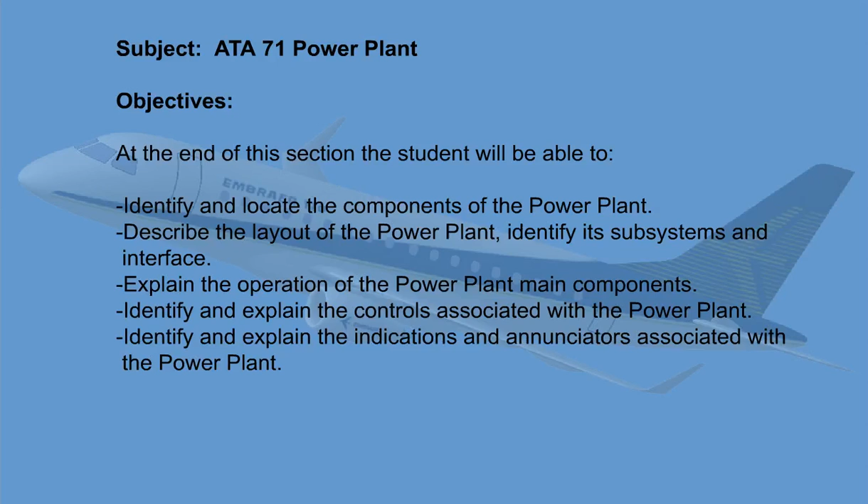Two GE CF34 turbofan engines designed for subsonic commercial airline service are installed on the Embraer E190. Each engine is housed in an aerodynamic nacelle and suspended from a pylon attached to the lower wing surface.

With a fan bypass pressure ratio of 5.4 to 1, a booster pressure ratio of 2.3 to 1, and a compressor pressure ratio of 11.4 to 1, the engine produces a maximum power of 18,820 pounds at ISA condition. The engine has a total length of 4.53 meters, 178.2 inches, a diameter of 1.85 meters, 72.8 inches, and an engine dry weight of 1,667 kilograms, 3,675 pounds.

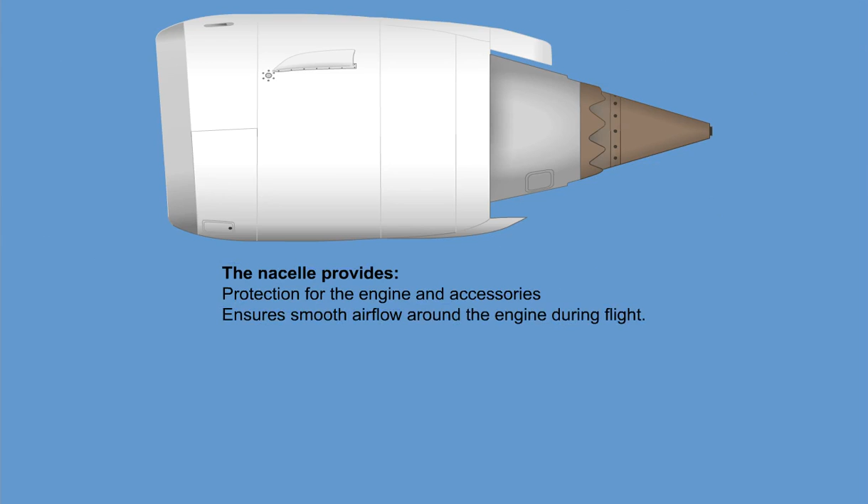The cowls which enclose the engine form the engine nacelle. The nacelle provides protection for the engine and accessories and also ensures smooth airflow around the engine during flight. The following cowls make up the engine nacelle: 1 inlet cowl, 2 hinged fan cowls, 2 hinged thrust reverser cowls, 2 hinged core cowls, and the primary exhaust nozzle.

The inlet cowl is a fixed interchangeable aerodynamic fairing which supplies the inlet airflow to the fan and to the core section of the engine. The inlet cowl is mounted on the forward face of the engine fan case and consists of an inlet lip, a forward bulkhead, an outer barrel, an acoustic inner barrel, an aft bulkhead, and an aft flange.

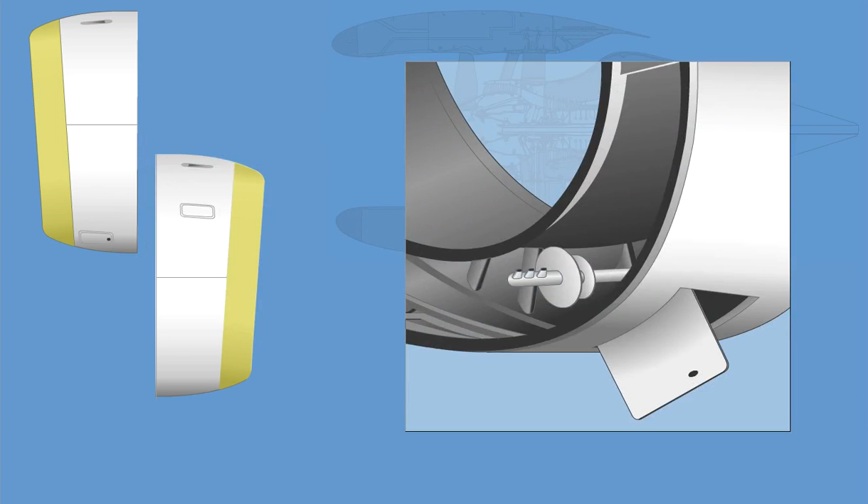The inlet lip is formed in a single piece and forms with the forward bulkhead a D-duct which contains the swirl nozzle. The purpose of the swirl nozzle is to deliver engine anti-ice air to the interior of the D-duct to heat the inner surface to prevent ice accumulation on the exterior surface of the lip skin. The anti-ice air is exhausted through 6 anti-ice exhaust ports located at the 6 o'clock position.

The outer barrel structure is made of an aluminum alloy and has panels to give access to components inside the inlet cowl. 2 inlets at the top let cool external air flow into the engine compartment for cooling, and a pressure relief door mechanically opens to release air pressure inside the inlet cowl. The outer barrel also has provisions for securing an inlet cover to protect the engine against foreign object debris, FOD.

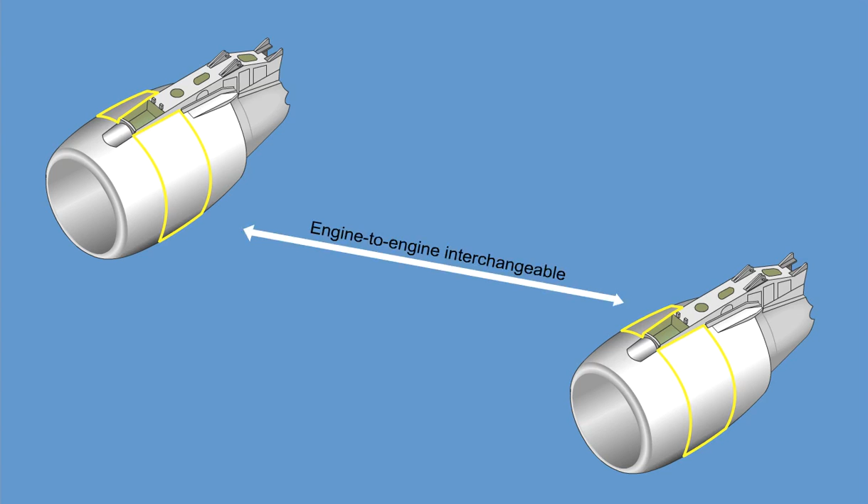The fan cowl door assemblies are engine-to-engine interchangeable units enclosing the engine fan case between the inlet cowl and the thrust reverser cowl. Each assembly is supported by 3 hinges at the pylon and latched to the other fan cowl along the bottom split line with 3 tension hook latches.

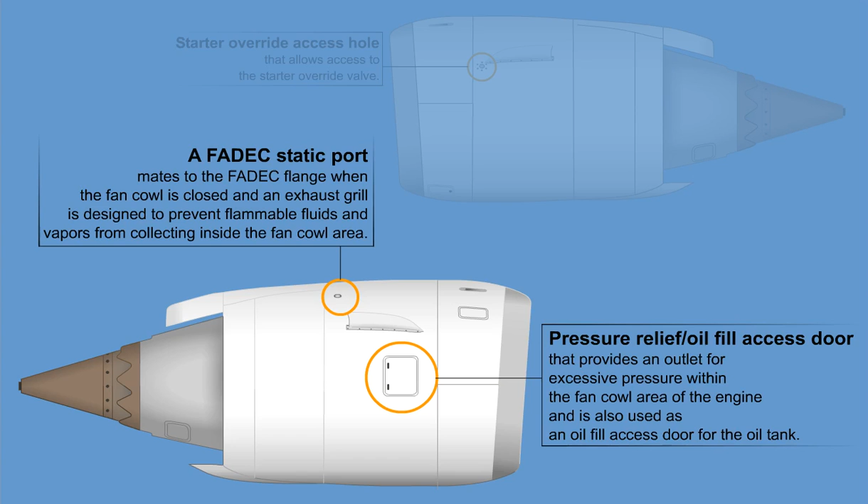The left fan cowl door contains a starter override access hole that allows access to the starter override valve. The right fan cowl door contains a pressure relief oil fill access door that provides an outlet for excessive pressure within the fan cowl area of the engine and is also used as an oil fill access door for the oil tank. A FADEC static port mates to the FADEC flange when the fan cowl is closed, and an exhaust grill is designed to prevent flammable fluids and vapors from collecting inside the fan cowl area.

The fan cowl may be opened to a maximum of 60 degrees and is held open by a rod which is stowed on the fan cowl.

The aft core cowls are located downstream of the thrust reversers and constitute the aft end of the engine core cowl, also serving as a pressure wall and a fire barrier between the engine core compartment and the fan duct.

Both aft core cowls can be opened to provide engine maintenance, are linked to the pylon by 3 hinges, and held together at 6 o'clock position by 3 latches. The doors are held open by support rods, which are mounted on each aft core cowl door. Note, the thrust reverser cowl must be opened before the aft core cowls can be opened.

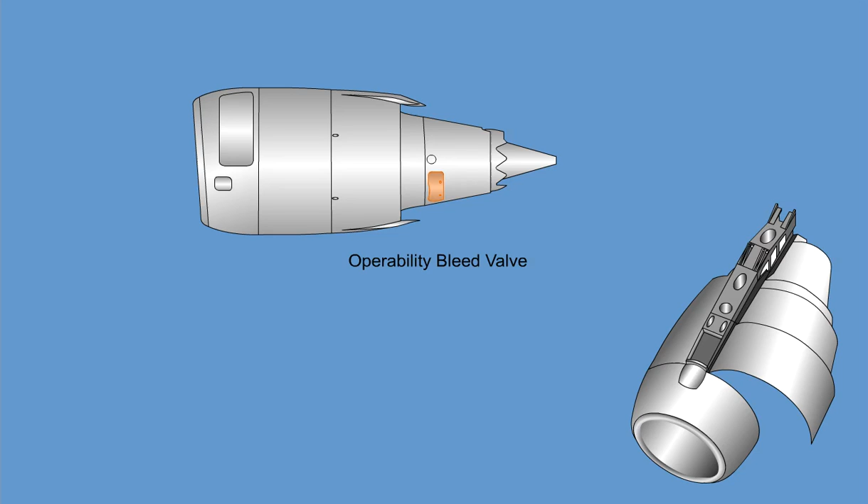The left aft core cowl has an operability bleed valve to allow engine bleed valve airflow to be discharged into the fan duct, and has a pressure relief door to minimize the amount of overpressure that can exist if an engine high-pressure duct fails. The right aft core cowl contains an engine oil service door used to access the oil filler port and an IDG oil sight glass door to access the IDG sight glass.

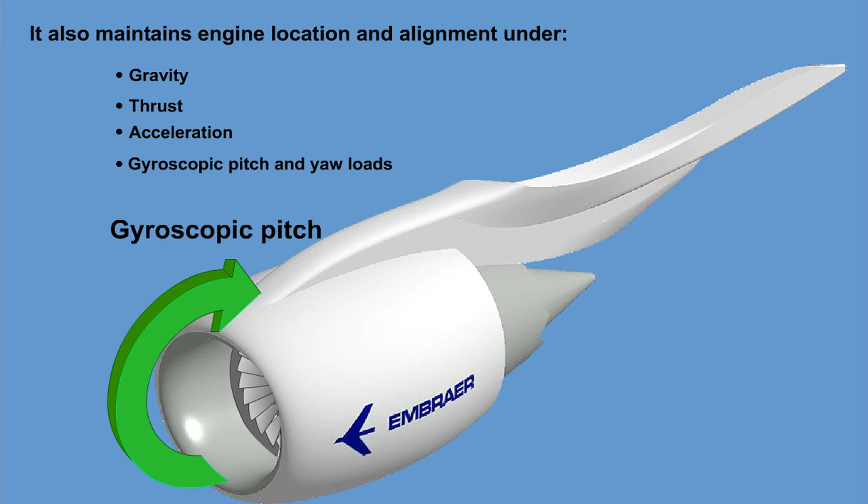The engine mounting system supports the engine by transmitting loads from the engine case to the pylon structure. It also maintains engine location and alignment under gravity, engine thrust, acceleration, and gyroscopic pitch and yaw loads encountered during any flight condition. The system isolates airframe deflections from the engine during any flight condition, accommodates thermal expansion of the engine, and permits simple engine installation and removal.

Each engine is connected to the pylon by a forward and an aft mount. The front mount attaches the fan OGV frame to the pylon and absorbs vertical, side, and torque loads. The aft mount attaches the engine mount ring and front frame to the pylon and absorbs vertical, side, and thrust loads.

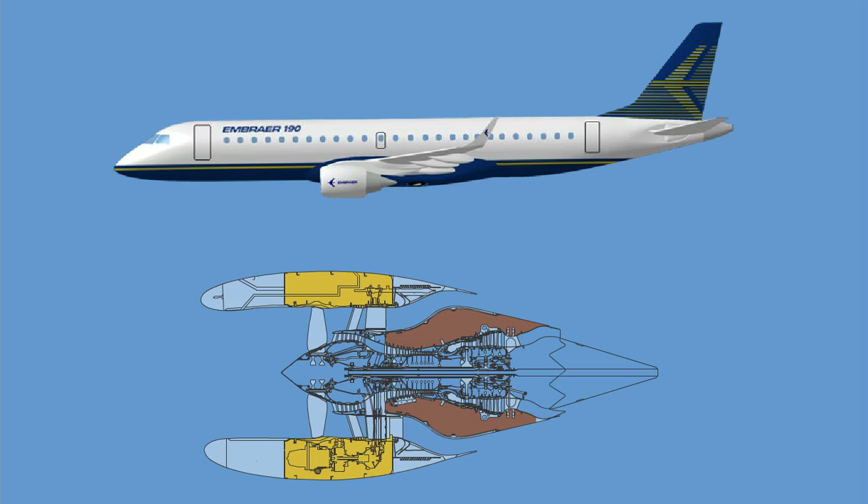The engine nacelle fire seals, made of fireproof materials, separate the cavities located between the engine and nacelle into sealed compartments to prevent the propagation of fire. The fire zone boundaries include the fan compartment and the core compartment. Each compartment has independent detection and fire extinguishing capability.

The inner fixed structure, IFS, of the thrust reverser core cowl forms the forward part of the engine core compartment fire zone and is covered on its inner side by fire blankets. The aft core cowl, ACC, forms the aft end of the fire zone and is made of an aluminum skin which contains a fireproof titanium sheet that is installed on the upper quadrant. A seal separates the forward IFS and the aft core cowl to form a zone closed off from the rest of the engine.

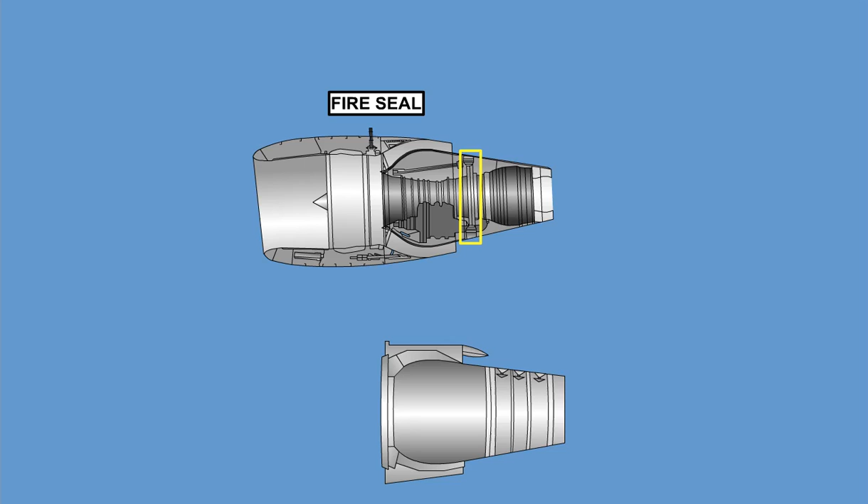The engine and nacelle drain system consists of lines and openings that direct any waste fluids from the engine and nacelle overboard. Two drain masts are used to discharge the drain fluids from the engine zones. The forward mast contains the accessory gearbox components and pad drains, as well as the oil scupper and pylon drains. The aft mast contains the fuel drains from the core-mounted components and the core pylon drain.

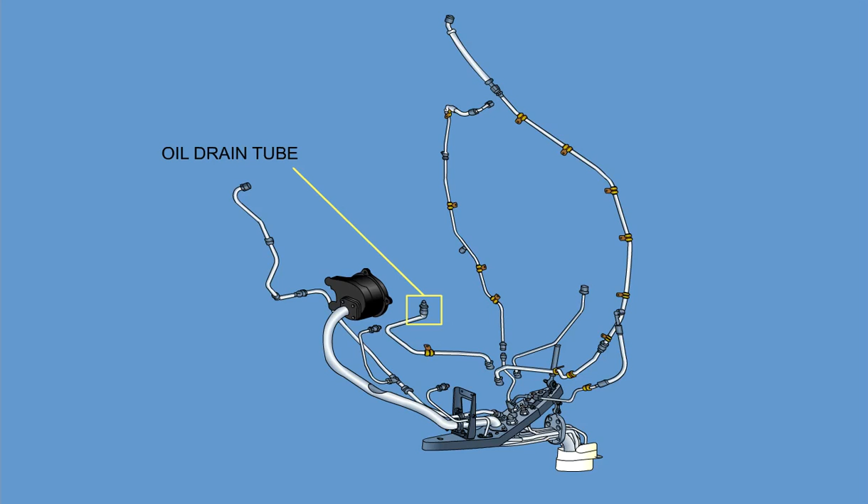The engine and nacelle drain system collects waste fluids that may accumulate during any abnormal operation. Oil is captured from the oil drain tube, the A-sump drain, and the air oil separator. Fuel is collected from the VGV actuators, the fuel pump pad on the accessory gearbox, the operability bleed valve, and the pylon. Hydraulic fluid is collected from the hydraulic pump on the accessory gearbox and from the pylon.

The force of gravity drains the fluids to a drain mast at the lowest point in the system, where they are discharged overboard. The drain mast is located behind the engine air intake, so that waste fluids will not be sucked into the intake. Fluids in the nacelle cavities drain directly from the cavity to the outside of the nacelle, through drain holes which are provided in the nacelle cowls.

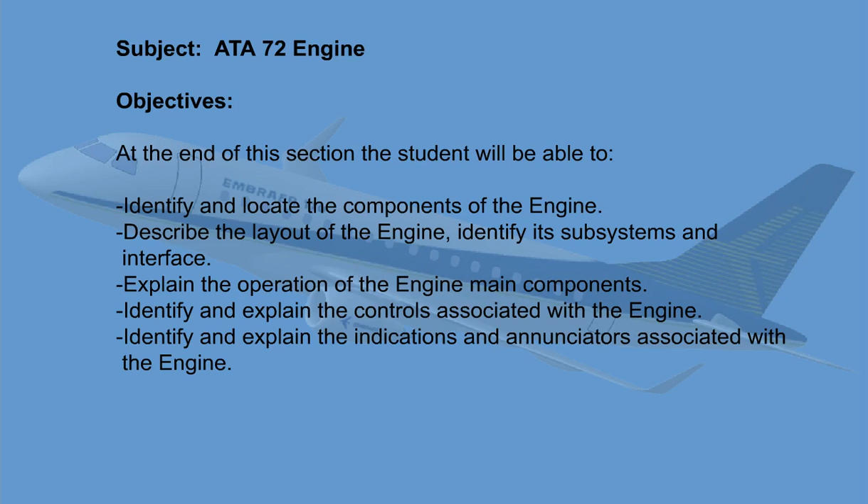The CF34-10E engine is a high-bypass turbofan engine which is a fully integrated engine with nacelle and thrust reverser. The core engine consists of the following modules: the fan module, the core module, the low-pressure turbine module, and the accessory gearbox module. The engine has a two-frame and two-sump structural design.

The fan module contains a 53-inch, 1,346 mm diameter single-stage fan and a three-stage low-pressure axial booster. The core module contains a 9-stage axial core compressor with bleed ports for customer bleed air connection at stages 5 and 9,

a single annular combustion chamber liner, a single-stage axial core air-cooled high-pressure turbine. The low-pressure turbine module contains a non-cooled 4-stage low-pressure turbine that drives the fan and axial booster. The accessory gearbox, mounted on the fan case, provides mounting pads for IDG and the hydraulic pump.

The engine low and high pressure rotors are supported by 5 main engine bearings. The low pressure rotor is supported by the number 1 thrust ball bearing, the number 2 and number 5 roller bearing. The high pressure rotor is supported by the number 3 thrust ball bearing and the number 4 roller bearing. The compressor rotor front shaft and the transfer gearbox are supported by ball bearing number 3.

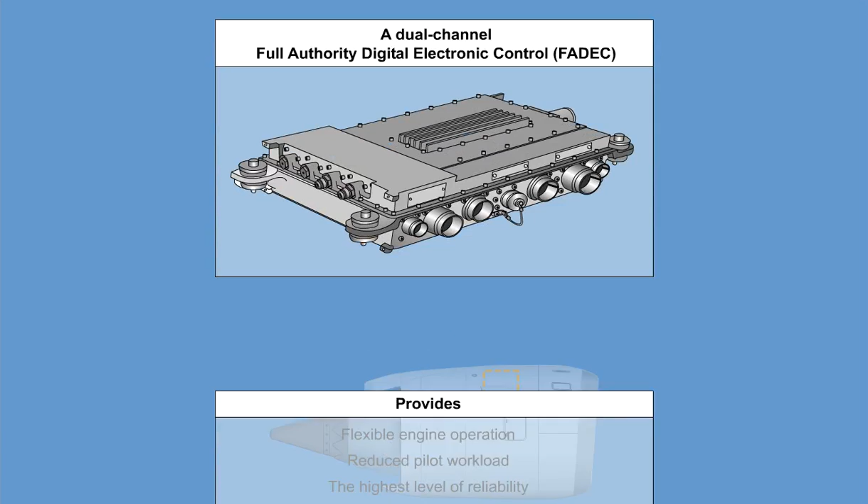A dual-channel, full-authority digital electronic control, FADEC, provides flexible engine operation, reduced pilot workload, and the highest level of reliability, safety, and maintainability.

The fan rotor and booster assembly provides the main thrust of the engine and also delivers air into the compressor section through the fan frame assembly. The low-pressure turbine rotor, via the fan drive shaft, provides driving power to the assembly.

The fan rotor and booster assembly main components are the fan rotor spinner, the fan rotor spinner support, the fan rotor blade retainers, the fan blade spacers, the Stage 1 fan rotor disc, the fan rotor Stage 1 blades, the Stage 1 fan rotor blade shims, and the booster assembly.

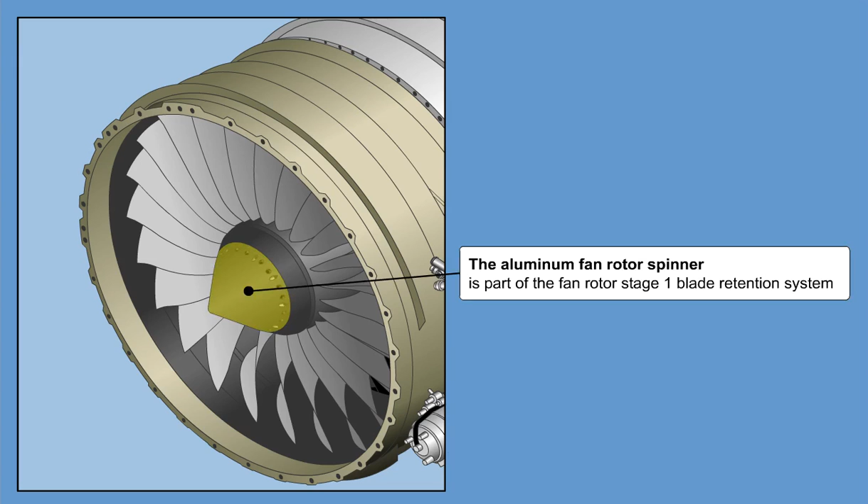The aluminum fan rotor spinner is part of the fan rotor Stage 1 blade retention system. For fan balancing, the mid-flange has tapped holes to install the trim balance screws. The design of the nose cone prevents ice formation.

The fan rotor spinner is bolted to the fan rotor spinner support, that again is bolted to the Stage 1 fan rotor disc.

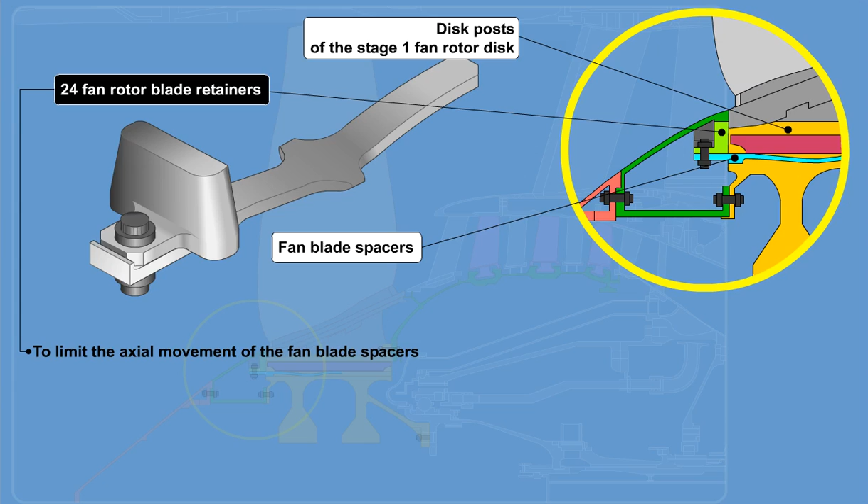24 fan rotor blade retainers are installed between the disc posts of the Stage 1 fan rotor disc and bolted to the fan blade spacers to limit the axial movement of the fan blade spacers. The retainers and the spacers are both part of the fan rotor Stage 1 blade retention system.

The fan blade spacers are installed between the dovetail slots of the Stage 1 fan rotor disc and the fan rotor blade shims to limit the radial movement of the fan rotor Stage 1 blades.

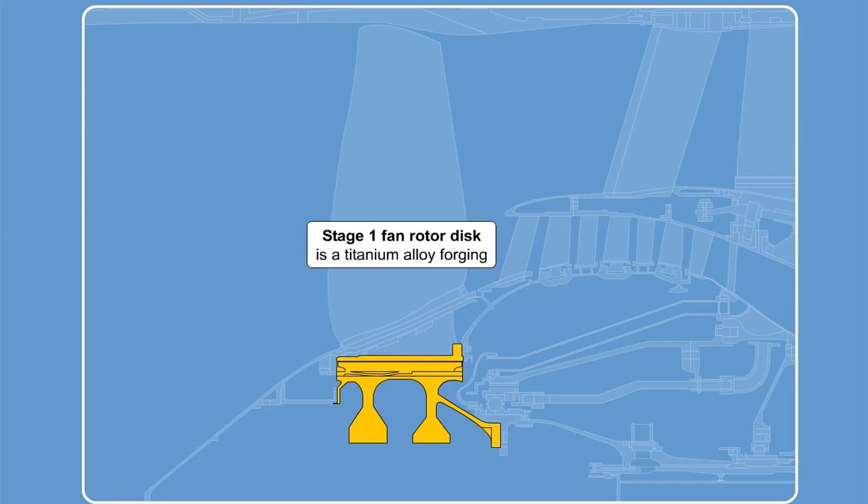The Stage 1 fan rotor disc is a titanium alloy forging. Its inner rear flange provides attachment for the fan shaft, and its outer rear flange is bolted to the booster spool. The outer front flange supplies attachment for the fan rotor spinner and the fan rotor blade retainers. The inner front flange supplies attachment for the fan rotor spinner support.

The outer rim of the Stage 1 fan rotor disc has 24 dovetail slots designed for fan rotor Stage 1 blade retention.

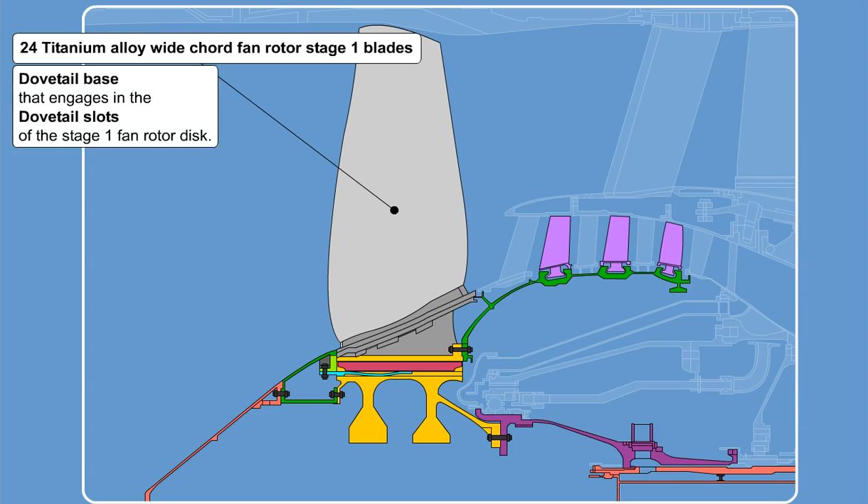24 titanium alloy wide chord fan rotor Stage 1 blades are installed in the Stage 1 fan rotor disc. Each of the fan blades has a dovetailed base that engages in the dovetail slots of the Stage 1 fan rotor disc. Blade shims are installed in the dovetail slots to limit the radial movement of each fan blade.

The booster assembly consists of the booster spool, the Stage 2 through 4 fan rotor blades, which serve primarily to supercharge the compressor rotor assembly, and the Stage 1 IGV through Stage 4 vane assemblies. The booster assembly is mounted on the rear of the Stage 1 fan rotor disc and acts as a stop for the fan rotor Stage 1 blades.

The fan frame assembly is the main forward support for the installation of the engine to the aircraft. It supports the fan and booster assembly and compressor rotor assembly and supplies ducting for primary and secondary airflows.

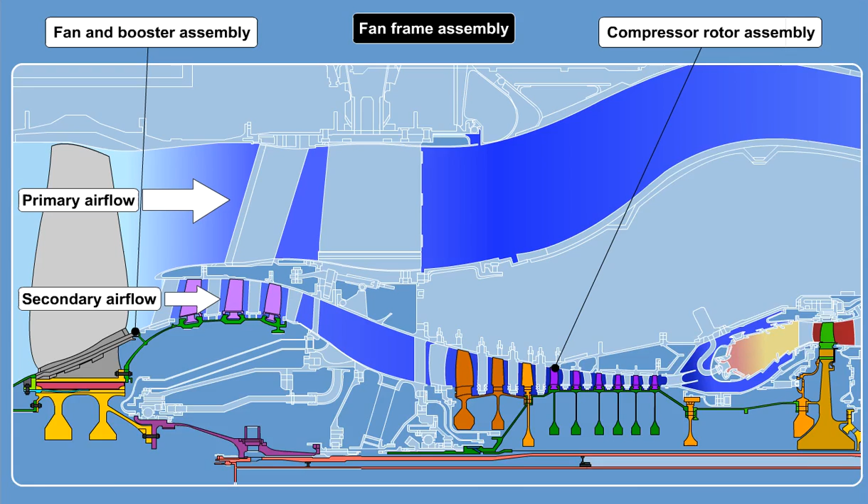The fan frame assembly consists of the fan frame, the aft fan case, the OGV fan stator vane assemblies, the fan outlet guide vane fairing, the splitter, and the fan stator containment case.

The aft fan case provides an inlet airflow path to the core engine and houses the accessory drive PTO bevel gears and driveshaft assembly, the variable bypass valve system, and provides attachment points for the OGV fan stator vane assemblies.

The fan frame is a basic 12-strut hub structure that provides supports for the PTO and the number 1 and number 3 bearings. The hollow struts have passages for equipment like the fan speed sensor and oil lines.

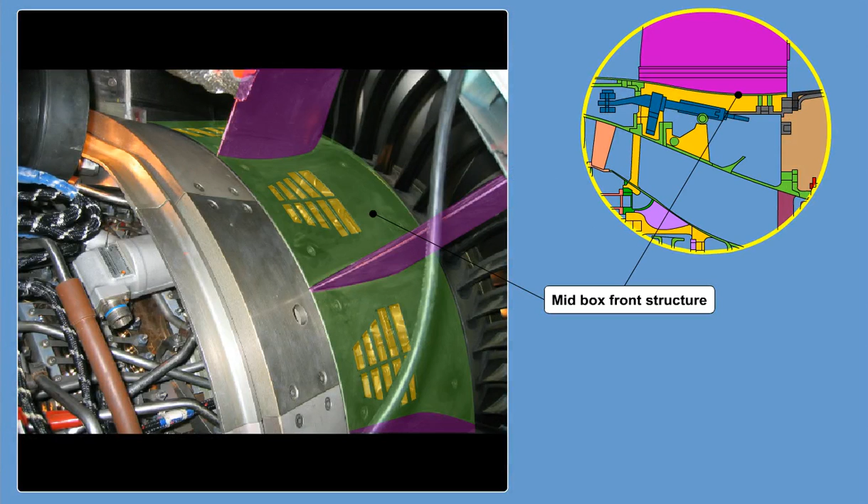The midbox front structure, located between the primary and secondary airflows, houses the 12 VBV doors and 2 VBV actuators at the 1:30 and 7:30 o'clock positions.

The OGV fan stator vane assemblies are individual vanes made of carbon fiber epoxy. The vane inner platforms are axially retained by the fan outlet guide vane fairing, while the vane outer platforms are attached with bolts to the aft fan case.

The fan outlet guide vane fairing, mounted between the fan frame and the splitter, contains grommets that support the inner platforms of the OGV fan stator vane assemblies.

The splitter is a fairing that divides the airflow into the booster assembly and fan bypass duct.

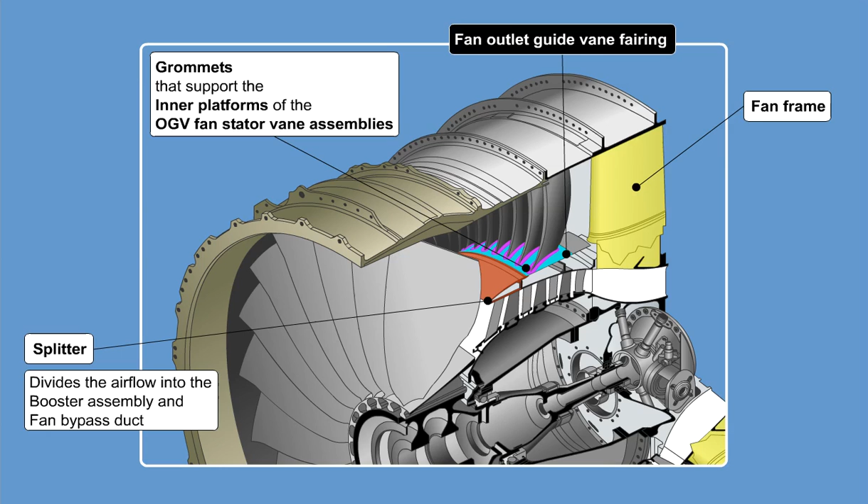The fan stator containment case provides fan rotor stage 1 blade containment in the event of a fan blade fracture. It also provides attachment points for the inlet cowl and houses the abradable liner for the fan rotor stage 1 blade tips.

The compressor section is located between the fan frame assembly and the combustion section and includes the compressor stator assembly and the compressor rotor assembly.

The compressor stator assembly is divided into a forward and rear compressor stator assembly and provides structural support for the engine between the fan frame assembly and the combustion chamber frame.

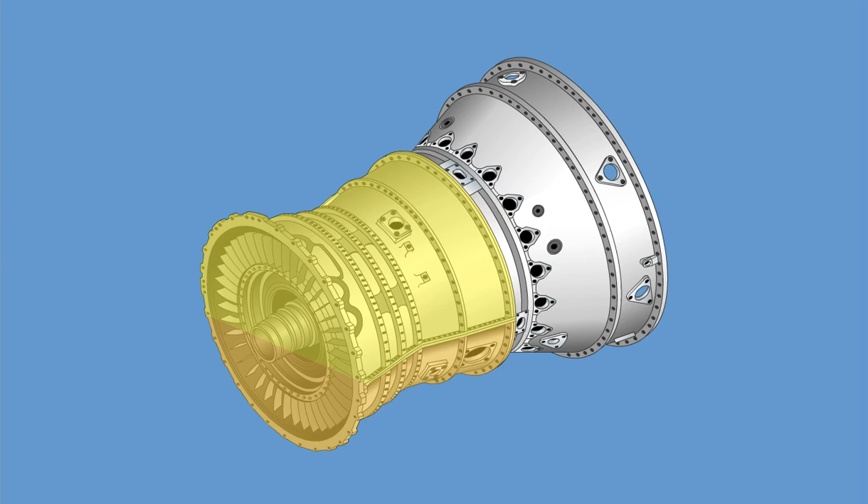The compressor stator case consists of 2 halves joined at a horizontal split line that permits on-wing removal of the top case half. The compressor stator case includes 2 integral air manifolds and stage 5 and stage 9 ports for bleed air connections.

Actuating arms and rings, controlled by the actuating system linkage assembly, control the position of the variable vanes of the inlet guide vanes and stage 1 through stage 3.

Stage 4 through stage 8 vane segments are installed into the ends of the compressor stator case and split on a horizontal plane to match the compressor case split line.

The compressor rotor assembly, together with the compressor stator assembly, compresses the air and discharges this air into the combustion chamber. The compressor rotor is a 9-stage axial flow design with a pressure ratio of 11.4 to 1. Components are held together at the stage 3 disc joint and at the compressor discharge pressure seal joint, which creates a rigid drum.

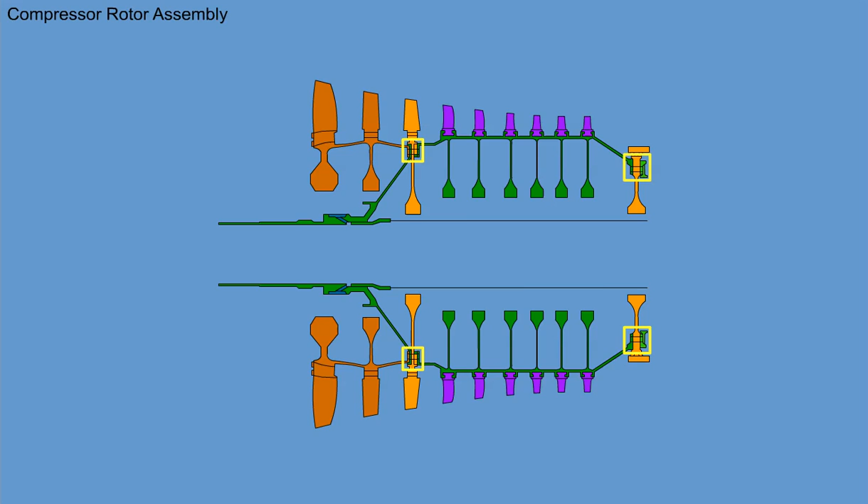The compressor rotor assembly consists of the compressor rotor forward shaft, the compressor rotor stages 1 and 2 spool, the compressor rotor stage 3 disc, the compressor rotor stages 4 through 9 spool, the compressor rotor stages 1 through 3 blades, the compressor rotor stages 4 through 9 blades, and the compressor rotor rear rotating air seal.

The compressor rotor forward shaft, bolted to the stage 3 disc, provides forward support for the compressor rotor assembly and contains splines that engage the compressor rotor assembly with the horizontal bevel gear of the power takeoff assembly.

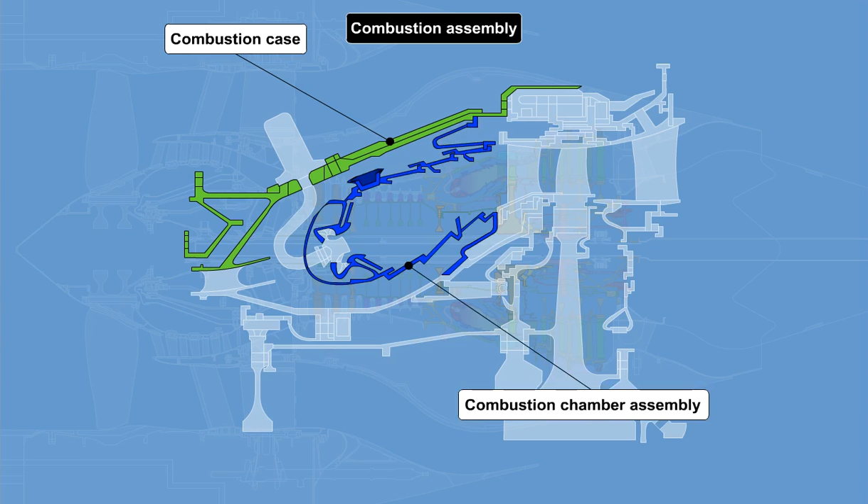The combustion assembly is installed between the compressor section and the low-pressure turbine module assembly and provides a flow path between the compressor section and the low-pressure section. The combustion assembly consists of the combustion case, the combustion chamber assembly, the high-pressure turbine stator interstationary seal, and the turbine nozzle assembly.

The combustion case contains bore scope inspection ports to access the combustion chamber, the high-pressure turbine rotor blades, and the Stage 1 low-pressure turbine blades.

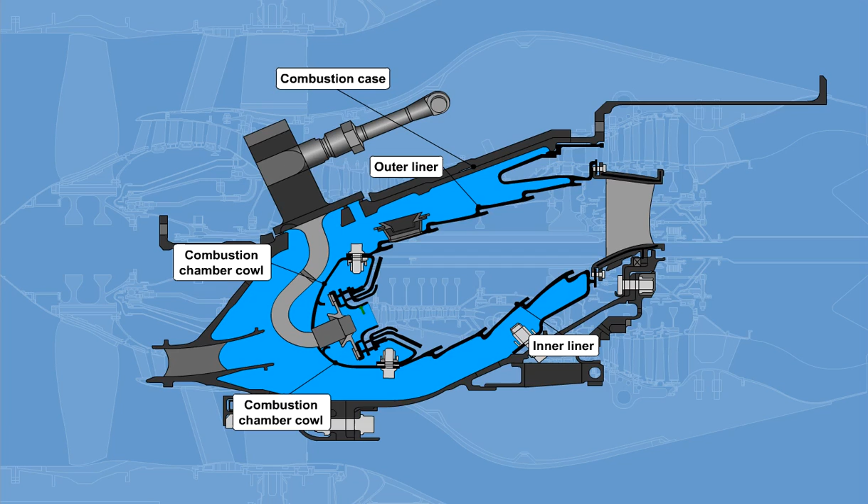The annular combustion chamber assembly provides a housing for the ignition of the fuel-air mixture. Air that exits the compressor is diffused into the combustion case. The inner and outer liner, supported by the combustion chamber cowl, capture the compressor discharge air for metering the airflow to the dome. Most of the dome airflow passes through the primary swirlers into the reaction zone, where it serves as primary combustion air. The remainder of the dome airflow is used for dome cooling.

The primary swirlers are fuel-air mixing devices which use high-energy air to atomize and aerate the fuel. The atomized mixture is introduced into the combustor reaction zone where it is ignited by the high-voltage igniters. Air that passes into the inner and outer passages of the combustion chamber shells serves as secondary air cooling to reduce turbine inlet temperature cooling of the combustor shells and other engine parts.

The turbine nozzle assembly is a single-stage air-cooled assembly that is mounted to the aft flange of the combustion chamber liner. The turbine nozzle assembly contains 19 high-pressure turbine stator nozzle segments that direct the gas flow from the combustion chamber assembly onto the high-pressure turbine rotor blades at the most optimal angle to permit the greatest performance during all conditions of operation.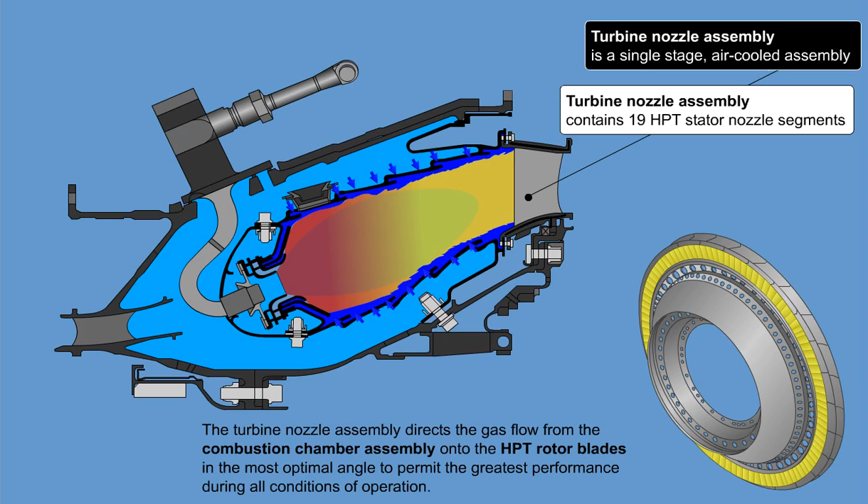The high-pressure turbine Stage 1 nozzle assembly directs the force of hot, high-velocity, high-pressure gas into the Stage 1 high-pressure turbine rotor blades. The high-pressure turbine Stage 1 nozzle assembly consists of the inner high-pressure turbine nozzle support and the 19 Stage 1 high-pressure turbine nozzle segments.

The nozzle segments, each with 2 vanes, are constructed of nickel alloy and are coated for environmental protection. The vanes are cooled by the compressor discharge air, which enters the vane segments at the top and exits the vanes through holes at the leading and trailing edges.

The high-pressure turbine HPT module consists of the HPT rotor assembly and the HPT stator assembly.

The high-pressure turbine rotor extracts energy from the combustion gases that exit the combustion liner and drives the compressor rotor assembly.

The HPT rotor assembly consists of the HPT rotor disc, the HPT front rotating air seal, the HPT rotor front shaft, the HPT rotor blades, the HPT rotor rear blade retainer, the HPT rear rotating seal, and the HPT rear shaft.

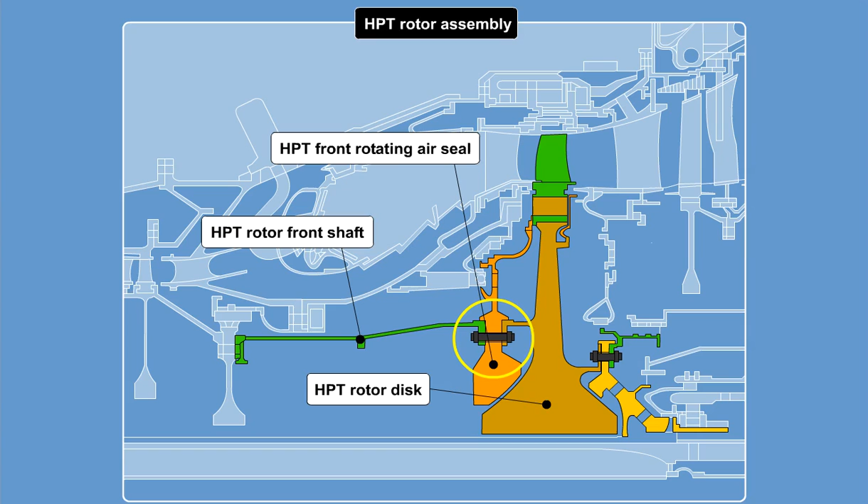The HPT rotor disc provides an attachment point on the forward flange for the HPT front rotating air seal and the HPT rotor front shaft that connects the HPT rotor disc to the compressor.

The HPT rotor blades have dovetail shanks that fit in slots of the HPT rotor disc and are axially locked in place by the HPT rotor rear blade retainer.

The blade airfoil and platform are top-coated with a white ceramic thermal barrier coating to lower the metal temperature and improve part life. Blade cooling is performed by compressor discharge air that enters the blade root and is forced out through holes in the blade leading edge, trailing edge, and the blade tip.

The HPT rear shaft, which is bolted to the HPT rotor disc, provides the aft support for the HPT rotor assembly.

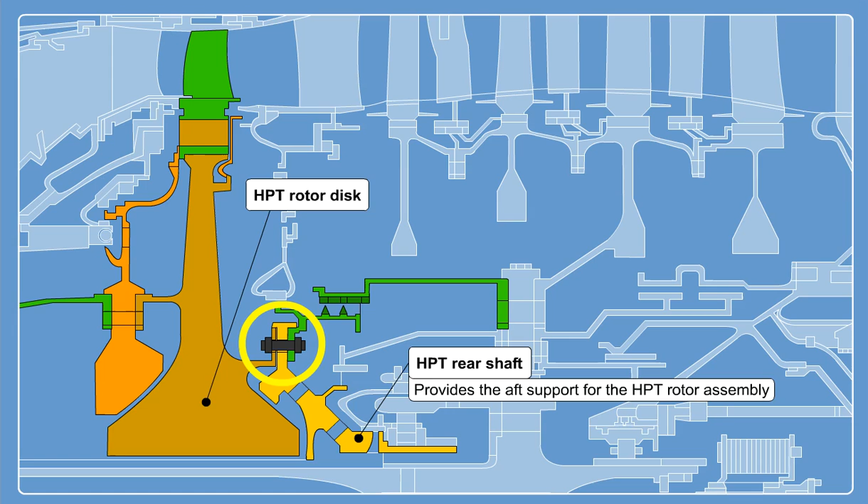Seal teeth of the HPT rear shaft and the honeycomb of the inner forward air rotating seal of the LP shaft assembly form a seal for the number 4 roller bearing sump.

The low-pressure turbine, LPT, rotor and stator assembly converts gas energy to rotational force required to drive the fan rotor and booster.

The LPT rotor consists of a 4-stage, tip-shrouded blade disc assembly and the stage 1 to 4 low-pressure turbine nozzles.

The stage 1 low-pressure turbine nozzle, which is mounted in the combustion case, is impingement cooled by high-pressure compressor 4th-stage bleed air. All other low-pressure turbine nozzle airfoils, stages 2 through 4, which are mounted in the low-pressure turbine case, are not air-cooled.

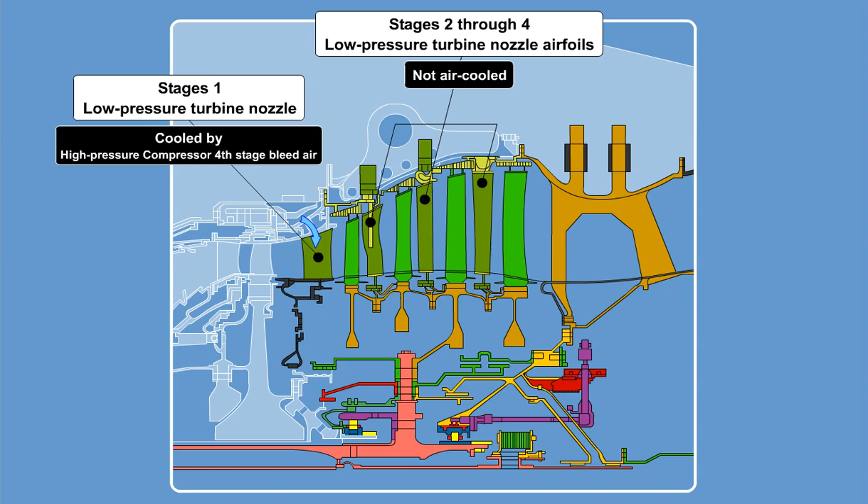To prevent air leakage between the 4 low-pressure turbine stages, integral inner seals on the low-pressure turbine nozzles run against interstage seals that are mounted on the low-pressure turbine rotor. The stages 1 through 4 shroud segments have open-face honeycomb wear surfaces to minimize air leakage at the LPT blade tips.

The LPT rotor consists of a 4-stage tip-shrouded blade disc assembly. The 4 discs and the interstage seals are fastened together with close-fitting bolts. The low-pressure turbine assembly is bolted to the low-pressure turbine shaft via the stage 3 disc and interfaces with the fan drive shaft with splines. The stage 1 to 4 low-pressure turbine blades are held in the discs by retainers, while the shrouded blade tips have interlocks that keep them rigid.

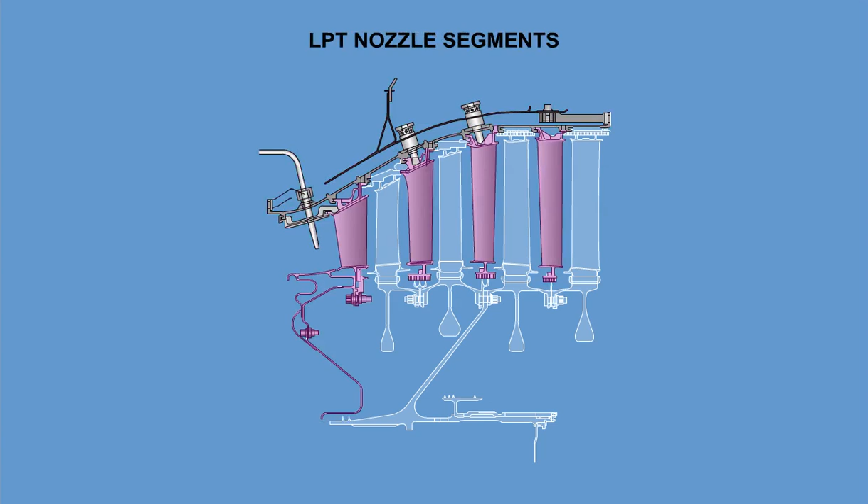The LPT case contains the LPT nozzle segments and the LPT shroud segments. The non-air-cooled stage 2 through 4 nozzle vane segments have integral inner seals against the interstage seal. The stage 1 through 4 shroud segments have open-face honeycomb wear surfaces to minimize air leakage at the LPT blade tips.

The turbine exhaust frame assembly is the third of 3 major structural frames in the engine. It is also the main structural support for the low-pressure turbine rotor and stator assembly. The turbine exhaust frame assembly supports the C-sump, which houses the number 5 bearing outer races.

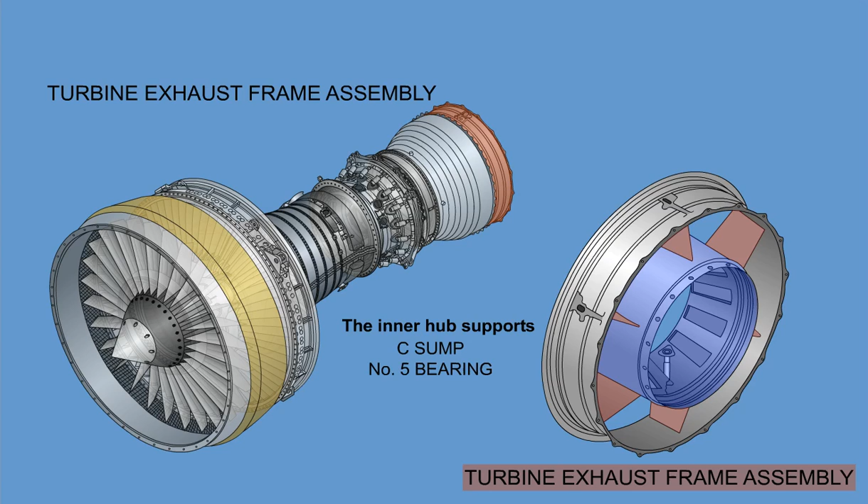The inner and outer cases are connected by 6 struts located at the 2, 4, 6, 8, 10, and 12 o'clock positions. The 6 struts support the inner hub, which supports the C-sump and the number 5 bearing. Service lines into and out of the C-sump are routed through 3 of the 6 struts.

The Engine Accessory Gearbox, AGB module, is a mechanical system that translates engine power to drive the engine accessories. The drive systems consist of the accessory gearbox, AGB module, the transfer gearbox, TGB, the radial drive shaft, and the inlet gearbox, IGB.

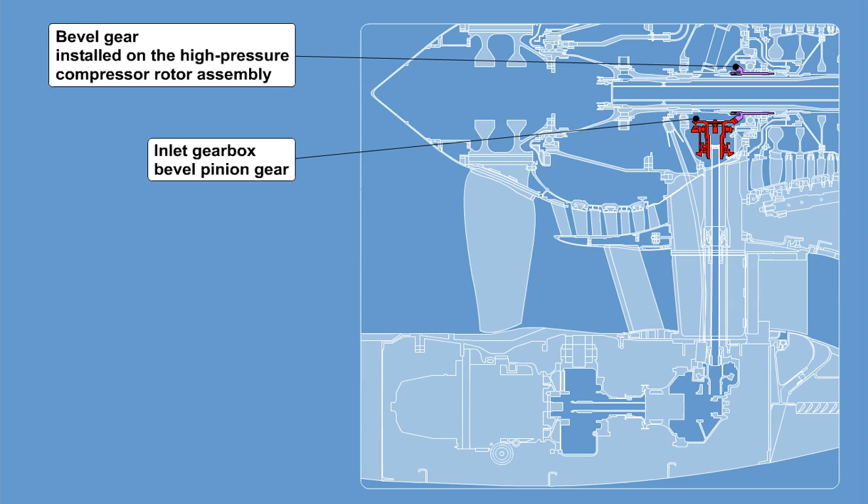Drive power from the engine to the accessory gearbox assembly is provided by a bevel gear installed on the high-pressure compressor rotor assembly, which interfaces with the inlet gearbox bevel pinion gear. The inlet gearbox bevel pinion gear is splined to the radial drive shaft, which passes through the number 10 strut in the fan frame assembly to drive the transfer gearbox.

The transfer gearbox assembly, installed on the fan frame at the 9 o'clock position, provides power transmission between the inlet gearbox assembly and the accessory gearbox module, and consists of the outer radial drive shaft, the transfer gearbox, and the horizontal shaft.

The outer radial drive shaft is installed inside the number 10 strut of the fan frame and is on one end internally splined to the inner radial drive shaft and on the opposite side externally splined to connect with the transfer gearbox axis-A pinion bevel gear.

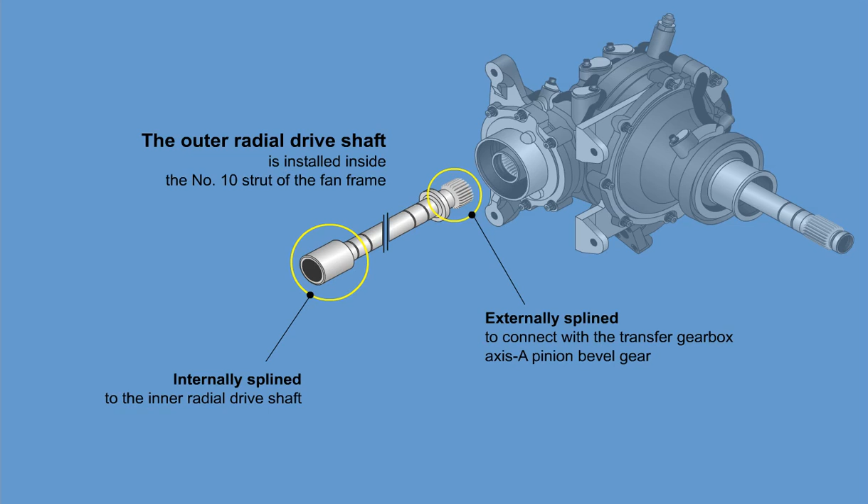The horizontal shaft supplies power transmission between the transfer gearbox and the accessory gearbox assembly and is splined at both ends. One end of the horizontal shaft connects with the accessory gearbox gear shaft, and the other end of the horizontal shaft connects with the splines of the axis B wheel bevel gear.

The accessory gearbox, AGB, is rigidly supported by the fan frame at 3 locations and is a cast 2-piece housing, with drive pads on the forward and aft faces of the gearbox to allow mounting of the accessories.

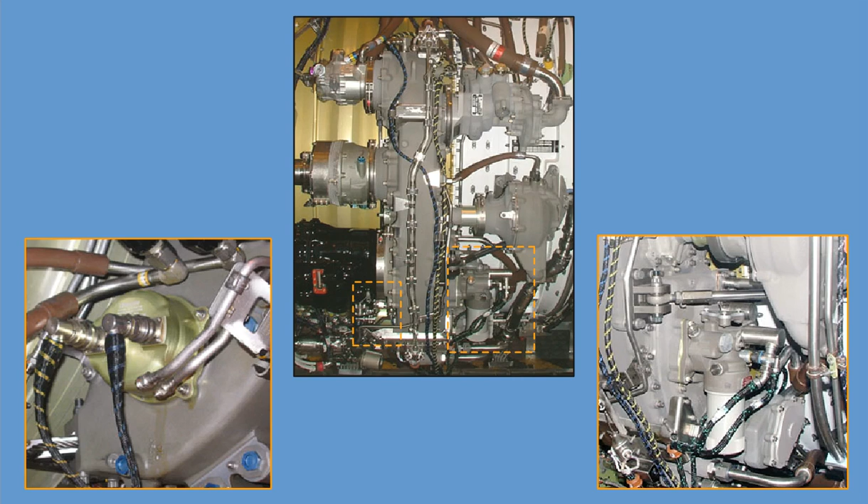The aft face of the accessory gearbox provides mounting pads for the lube and scavenge oil pump, the oil filter manifold, the engine-driven fuel pump, and the input connection for the horizontal drive shaft.

The front face of the accessory gearbox provides mounting pads for the engine-driven hydraulic pump, the PMA, the air turbine starter, and the IDG. A drain plug is located at the 7 o'clock position to allow drainage of the accessory gearbox cavity for shipping or troubleshooting purposes.

The engine fuel system has 2 subsystems, a fuel control system and a fuel distribution system, which provides the engine with scheduled fuel for combustion.

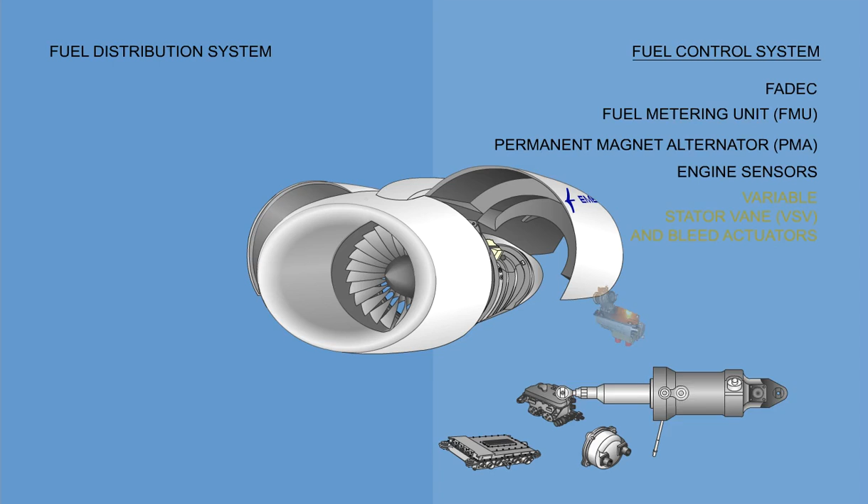The engine fuel control system is composed of a 2-channel full authority digital electronic control, FADEC, a fuel metering unit, FMU, a permanent magnet alternator, PMA, engine sensors, variable stator vane and bleed valve actuators, a transient bleed valve, TBV, and the high-pressure turbine clearance control, HPTCC valve.

The components of the fuel distribution system include the fuel pump, fuel filter, 2 fuel manifolds, and 20 fuel injectors.

The fuel distribution system starts when the fuel from the aircraft fuel tank enters the engine fuel pump inlet, where the fuel pressure is increased by a centrifugal boost pump located in the engine fuel pump. Fuel discharged from the boost pump splits inside the pump housing and is either returned via the positive displacement motive gear stage to the aircraft as motive flow or routed toward the main gear pump inlet.

The flow that is not directed to the aircraft as motive flow leaves the boost pump and joins up with the return or bypass flow coming from the FMU. This combined flow then passes through the main fuel oil heat exchanger to cool the engine lubricating oil. The fuel oil heat exchanger also heats the fuel to provide icing protection in the event of trapped water in the fuel during cold day operation.

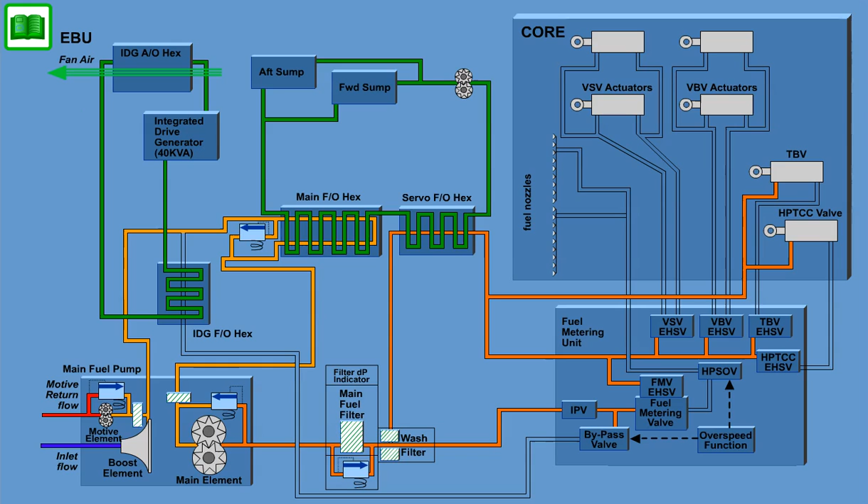The EHSVs operate the fuel metering valve, FMV actuator, the variable stator vane, VSV actuators, the variable bypass valve, VBV actuators, the high-pressure turbine clearance control, HPTCC valve, and the transient bleed valve, TBV.

The main flow exiting the fuel filter is directed to the inlet of the FMU. Fuel entering the FMU passes through the inlet pressurizing valve, IPV, and then enters the bypass valve. At the bypass valve, the fuel is either returned to the pump or is directed to the metering valve.

The metering valve is positioned by the FADEC to provide the proper burn flow to the combustion chamber fuel injection nozzles. Metered fuel flow exits the FMU through the shut-off valve to the 2 fuel manifolds, where it is distributed to the 20 fuel nozzles.

The fuel control system is managed by a 2-channel full-authority digital electronic control, FADEC. The FADEC controls the engine fuel requirements in response to thrust command inputs from the aircraft.

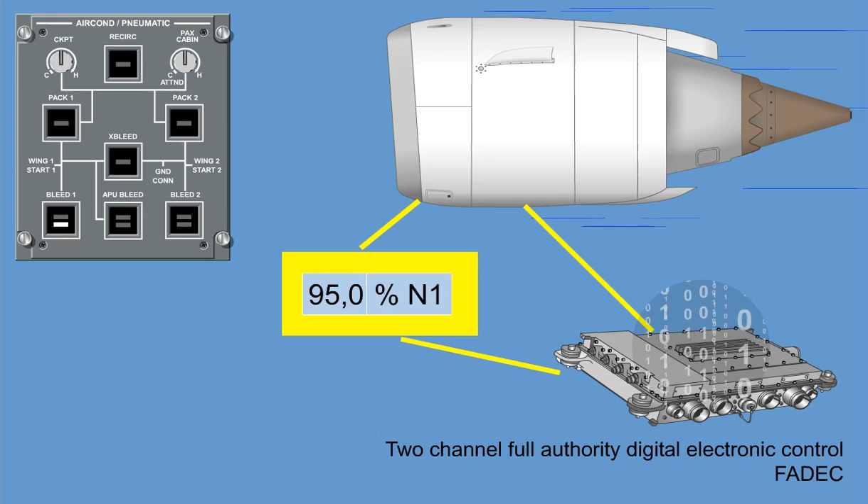The FADEC software provides thrust management based on aircraft and air data inputs. These inputs are used to calculate appropriate reference N1 for any given throttle position.

Some of the N1 references are modified by discrete inputs like Automatic Takeoff Thrust Control System, ATTCS, Thrust Reverser Position, Weight on Wheels, and Bleed discrete inputs.

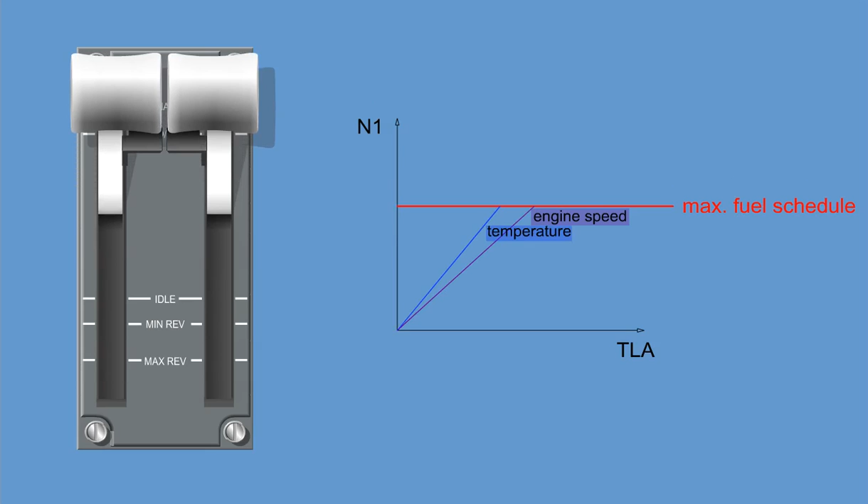In addition to setting the correct N1 for a given TLA position, the FADEC schedules limit fuel to protect the engine speeds, temperature, and compressor discharge pressure, CDP, limits.

The fuel pump, mounted on the aft face of the accessory gearbox, provides sufficient fuel flow and pressure to meet engine burn flow requirements, as well as fuel for the fuel-operated actuators and valves, and motive flow for the fuel tank ejector pumps. The fuel pump consists of a centrifugal boost element and 2 fixed displacement high-pressure gear elements.

The fuel pump has a spline drive shaft that engages a wet spline within the AGB pad, and a V-band coupling secures the fuel pump to the accessory gearbox.

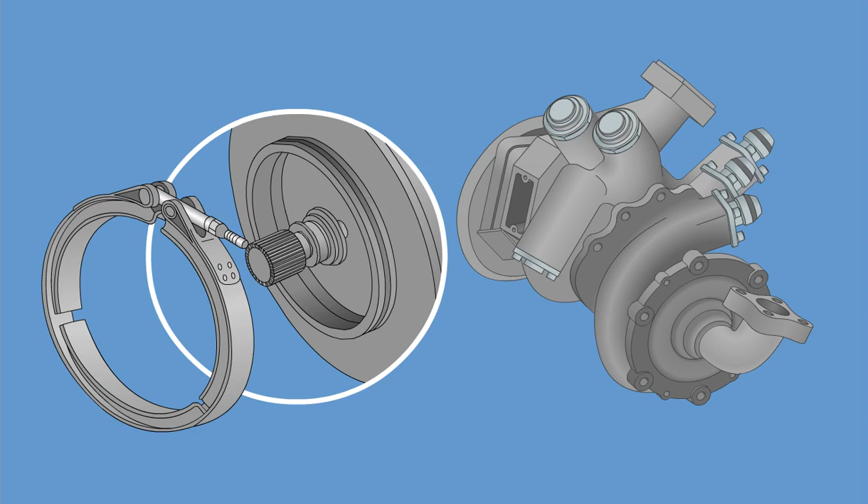Filtration of the fuel system is provided by a main fuel filter, which is mounted at the 3 o'clock position of the fan case. The filter contains a differential pressure switch that provides indication in the event of an impending bypass. In the event of a complete filter blockage, a bypass valve opens to ensure fuel supply to the FMU.

To minimize fuel spillage during fuel filter replacement, the filter bowl contains a drain plug to drain the filter bowl before removing the filter element.

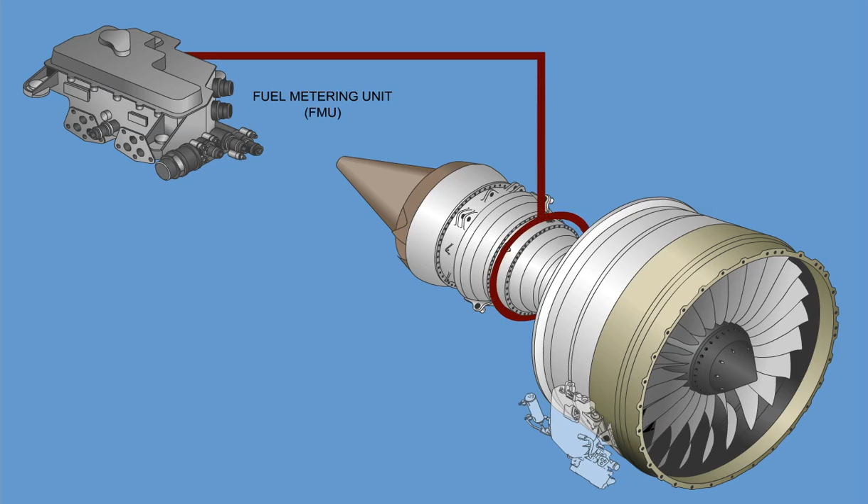The fuel metering unit, FMU, is mounted on brackets attached to the fan case at the 5 o'clock position. The main purpose of the FMU is to provide accurate metered fuel flow to the engine for combustion. The FMU also provides fuel flow for variable stator vane and variable bypass valve actuation, operates the high-pressure turbine clearance control valve and the transient bleed valve, and provides fuel shutoff for normal engine shutdown and for overspeed protection.

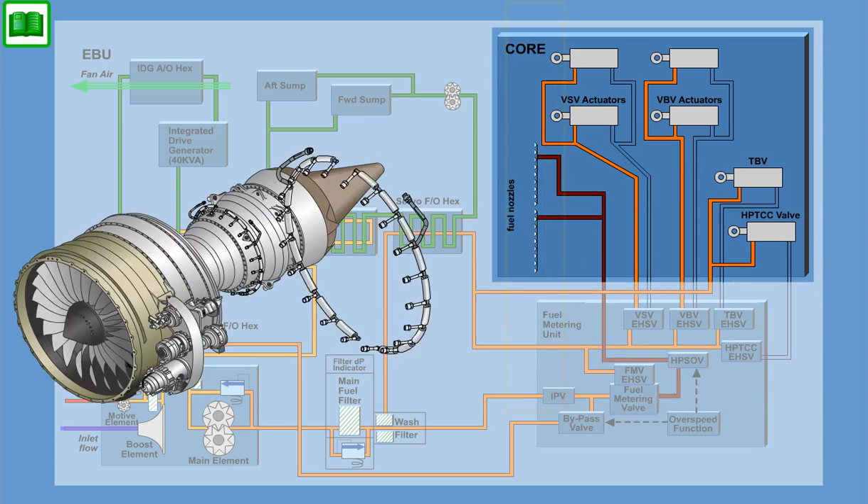Fuel from the main fuel barrier filter and servo wash filter enters the FMU, where it passes through the inlet pressurizing valve, IPV. The fuel then enters the bypass valve and is either returned to the pump or passes through the valve to the metering valve. The metering valve is positioned by the FADEC to provide the proper burn flow to the fuel nozzles. Metered fuel flow exits the FMU and passes through the fuel manifold, where it is distributed to the 20 fuel nozzles. The fuel manifold is located around the circumference of the combustion chamber frame, just aft of the forward flange.

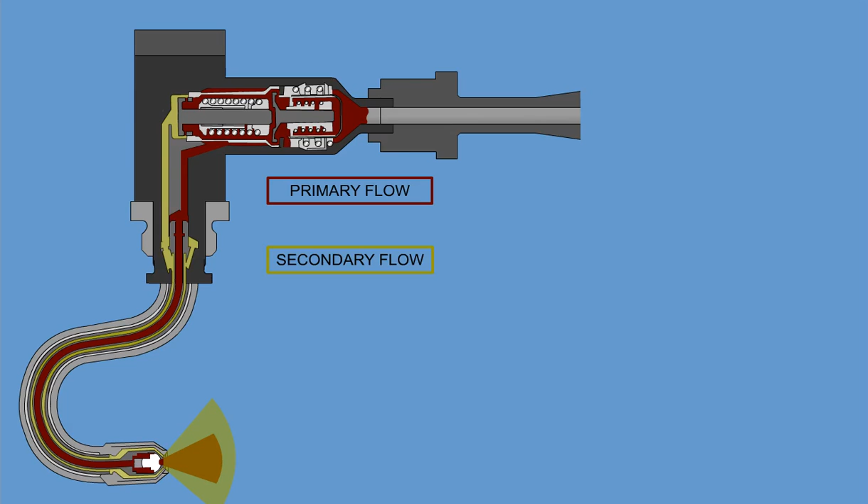Fuel coming from the FMU enters the fuel manifold and is distributed to the 20 fuel nozzles. The fuel injectors receive the metered fuel from the FMU and atomize it into the domed combustor. Based upon the fuel pressure delivered, a distributor valve located in the fuel injector ports fuel to the primary and secondary fuel flow circuits. The primary circuit is used during start and low power, while the secondary circuit provides additional flow at high power. Each fuel injector has a check valve that closes at engine shutdown to prevent the manifolds from draining into the combustor.

The variable bypass valve system controls the booster operating limits, provides optimum booster performance at steady-state conditions, and prevents stall. The system consists of 2 VBV actuators which operate via adjustable links, bell cranks and actuating rings, and 10 VBV doors that open to bleed excess booster discharge airflow or close to allow zero bleed.

The VBV system is controlled by the FADEC and operates from idle, doors open, to takeoff power, doors closed. During reverse thrust, the FADEC will partially open the VBV doors to increase booster stability and to prevent core engine foreign object damage. During engine shutdown, the VBV doors are driven open.

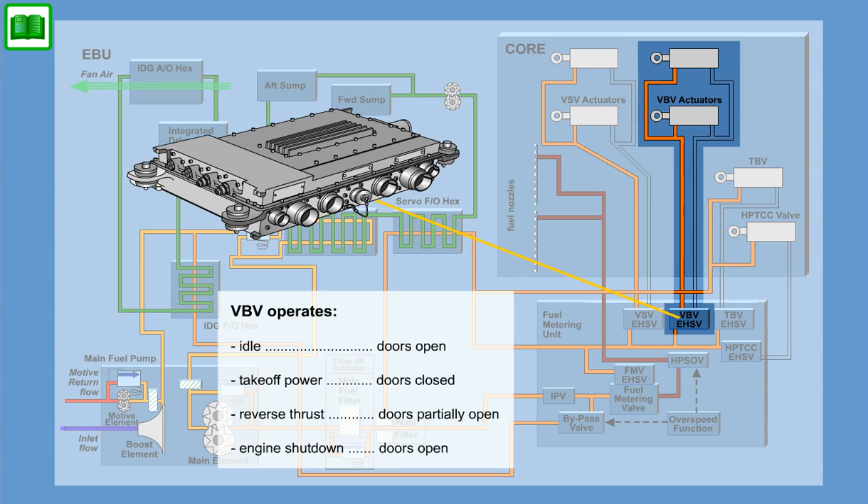The FADEC determines the required VBV position based on engine sensor inputs and sends an electrical signal to the FMU, which supplies servo fuel to both VBV actuators. Movement of the actuators will open or close the 10 VBV doors. Each of the 2 actuators contains a single LVDT. One actuator provides bleed valve position feedback to the in-control FADEC channel, while the other actuator provides position feedback to the standby channel.

The variable stator vane, VSV, actuation system varies the angle of attack of the variable compressor stator vanes to maintain a smooth, turbulence-free airflow through the compressor rotor at all engine operating speeds, temperatures, and altitudes by means of 2 VSV actuators that are mounted on 2 sides of the forward compressor stator case.

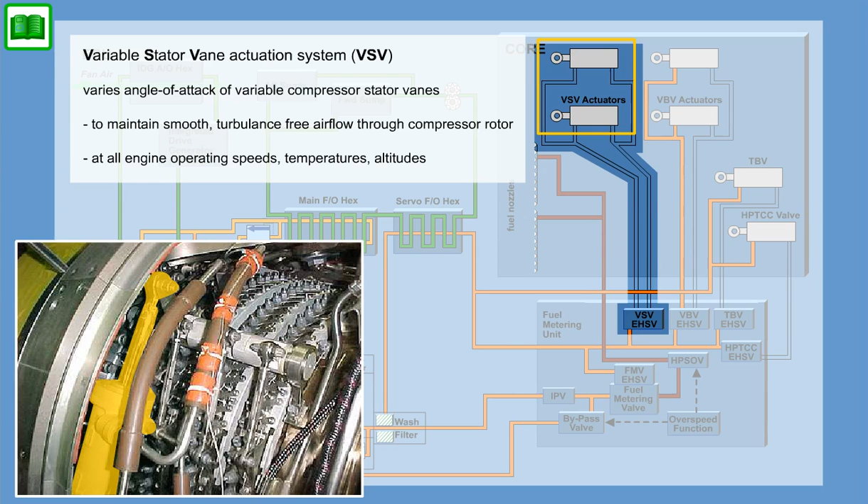The FADEC continuously determines the needed VSV position based on engine sensor inputs and sends, when required, an electrical signal to the FMU, which sends servo fuel to both VSV actuators. Movement of the actuators will adjust the compressor stator vanes to the required position via torsion tubes, links, and actuating rings. Each of the 2 actuators contains a single LVDT. One actuator provides stator vane position feedback to the in-control FADEC channel, while the other actuator provides position feedback to the standby channel.

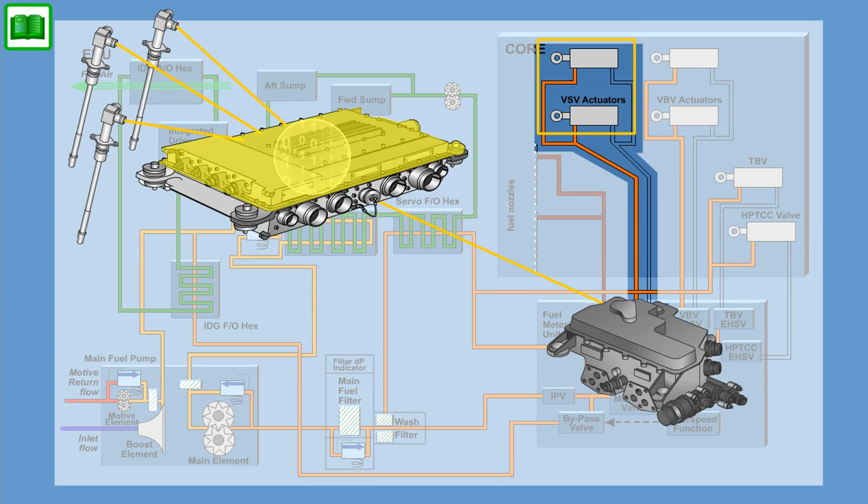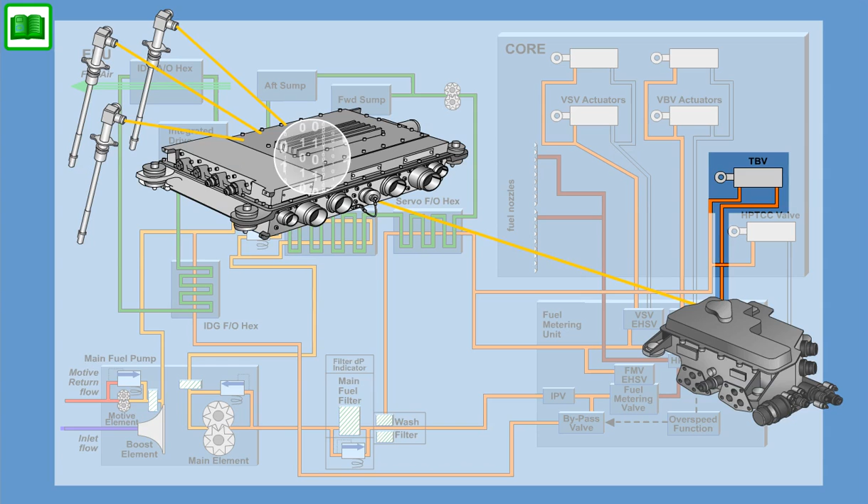The transient bleed valve, TBV, system bleeds air from the compressor rotor to provide compressor stall margin. Using aircraft and sensor inputs, the FADEC uses fuel metering valve servo fuel to open the transient bleed valve during engine starts and during engine transients to protect the engine stall margin. When the transient bleed valve is commanded open, compressor discharge air is exhausted overboard into the exhaust nozzle. Dual LVDTs attached to the valve provide position feedback to each FADEC channel.

During normal engine operation, the fuel metering valve is set to the desired flow position, and the bypass valve bypasses the excess pump flow needed to maintain the appropriate differential pressure across the fuel metering valve. At engine speeds below 20%, the pressurizing shutoff valve sets a low pump differential pressure setting of plus or minus 150 psid. As engine speed increases, system pressure regulation is transferred to the IPV, which has a much higher setting, plus or minus 350 psid, for actuation of the engine variable geometry system. The IPV maintains this pressure level until the FMU's back pressure overcomes the IPV setting.

The shutoff overspeed valve is positioned so that boost pump pressure is ported behind the pressurizing valve, and so that the bypass valve's compensating land is deadheaded. The shutoff overspeed valve is positioned by the overspeed solenoid, which supplies high pressure to the valve in order to obtain the necessary force margin.

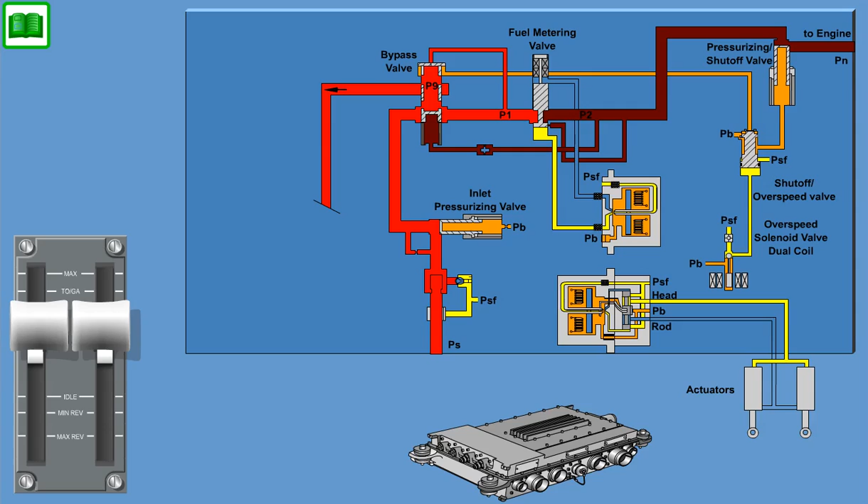A repeatable flow schedule is accomplished by maintaining a constant differential pressure across the fuel valve port. Therefore, metered flow is a function of valve area, and therefore valve position. The flow versus position schedule is digitally mapped into the control software of the FADEC. Fuel sent to the combustor can therefore be scheduled by simply positioning the fuel metering valve, FMV.

Additionally, the FMU sets a minimum differential pressure across the high-pressure pump at engine starting and low-metered fuel conditions. This function is required for hydraulic actuation of the engine variable geometry, as well as for positioning control within the FMU. Metered flow passes through the pressurizing shutoff valve and exits the FMU to be burned in the engine combustor.

In addition to setting a low pressure for start and relights, the pressurizing shutoff valve provides a zero-leak shutoff following operation of either the overspeed system or after normal shutdown.

During normal operation, the VSV, VBV, HPTACC, and TBV actuators are positioned by the FADEC by a current command to the dedicated electro-hydraulic servo valve, EHSV, within the FMU. The LVDT feedback from the actuators is used to close the position loop through the FADEC.

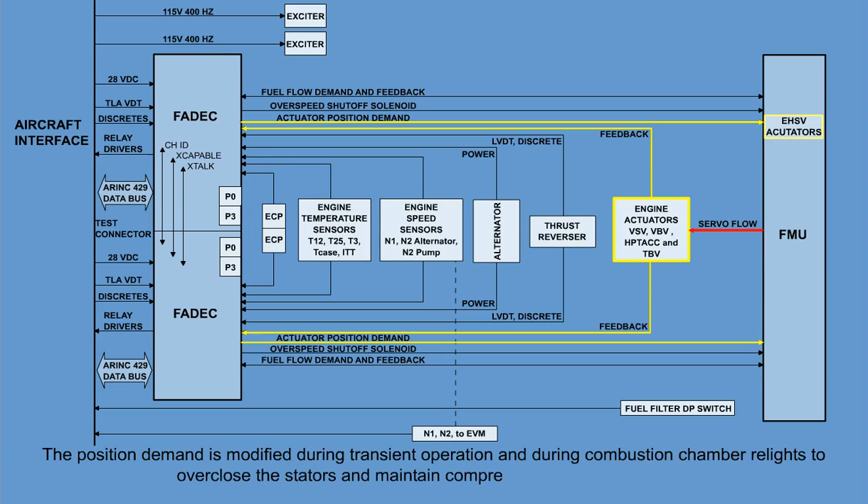The VBV actuator is positioned by the FADEC as a function of corrected N1. The position demand is modified during transient operation to maintain booster operability margins.

During steady-state engine operation, the TBV will be commanded closed. During transient operation, combustion chamber relights, and engine starting, the TBV is scheduled open in order to bleed the compressor and maintain compressor operability margins.

The HPTACC valve position demand is computed in the FADEC software to optimize the turbine clearance as a function of the engine operating conditions.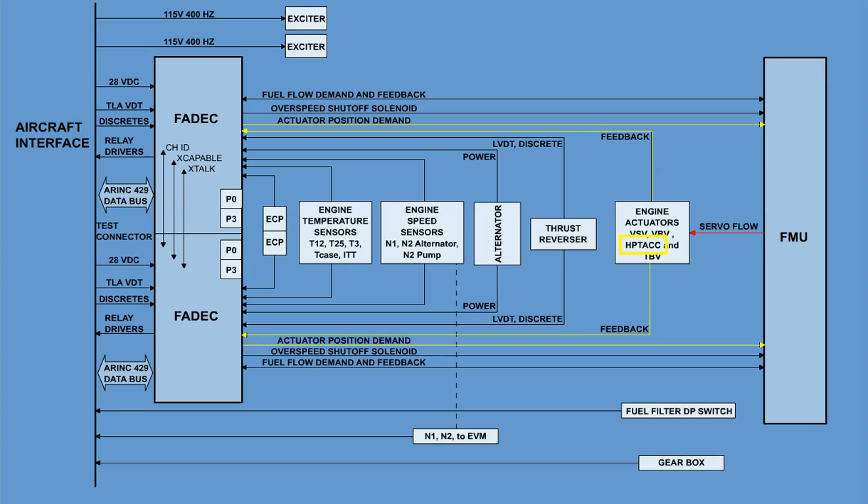The core speed rotor provides overspeed protection. The fan rotor will not overspeed unless the core rotor first overspeeds. When an overspeed condition is detected, for example, the core rotor is greater than 102% RPM, the fuel shutoff solenoid in the FMU closes, causing an engine flameout.

Dedicated electronic speed switches in the FADEC provide overspeed protection. Each FADEC channel has 2 speed switches that monitor the core rotor speed. One speed switch uses the speed signal from the alternator, and the other speed switch uses the speed signal from the N2 speed sensor. Both switches must close to flame out the engine. The overspeed system in both channels is always active regardless of which channel is in control.

The engine fuel indicating system is monitored by engine-mounted sensors which give their information to the EICAS. The indicating system consists of a fuel filter bypass switch, a fuel low-pressure switch, and a fuel flow measuring device.

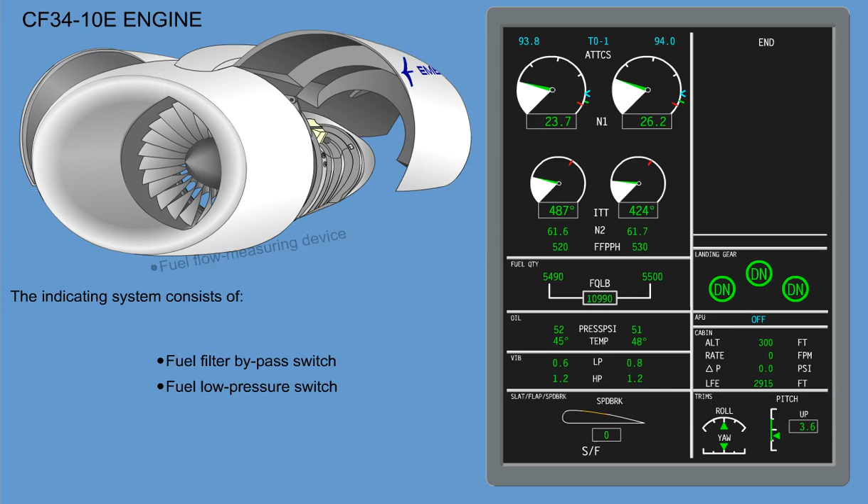The fuel filter impending bypass sensor, mounted in the fuel filter housing, senses the pressure drop between the inlet and the outlet of the fuel filter. Should the pressure drop across the fuel filter caused by filter contamination exceed the specified limit, a signal is sent via the MAU to the EICAS to indicate that the filter is at impending bypass.

The fuel low-pressure switch is mounted in the fuel feed line near the fuel pump inlet. The switch senses the fuel pressure going into the main fuel pump supply line. When the fuel pressure drops below a predefined value, a signal is sent via the MAU to the EICAS.

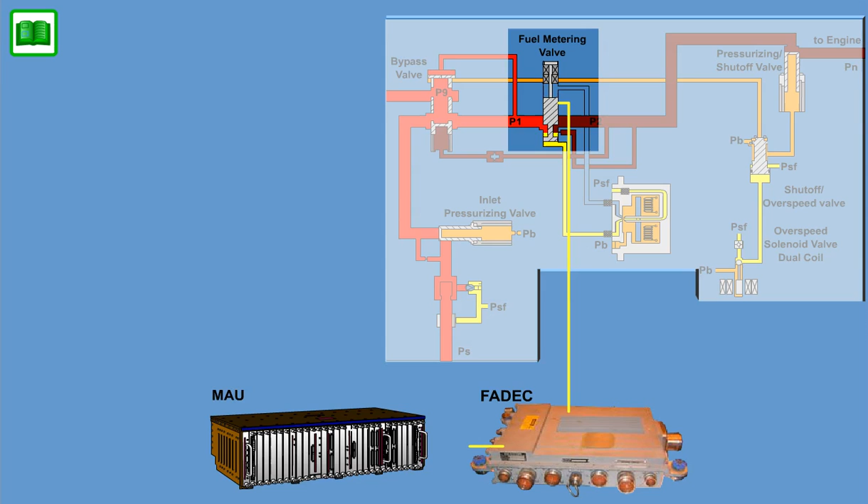Fuel flow indication is not measured by a common fuel flow transmitter. Rather, the fuel flow is measured by the FMU metering valve. The metering valve position is converted to fuel flow in a lookup table in the FADEC and transmits this signal via the MAU to the EICAS fuel flow indicator as pounds or kilograms per hour.

Fuel flow indication is not measured by a common fuel flow transmitter. Rather, the fuel flow is measured by the FMU metering valve. The metering valve position is converted to fuel flow in a lookup table in the FADEC and transmits this signal via the MAU to the EICAS fuel flow indicator as pounds or kilograms per hour.

The engine control system provides steady state and transient regulation of thrust while protecting the engine compressor aerodynamic and aeromechanical stability limits, combustion blowout limits, and the fan and compressor rotor mechanical limits. The system also provides independent protection of compressor rotor overspeed, but does not provide explicit protection against a turbine temperature over temperature with the exception of ground starts.

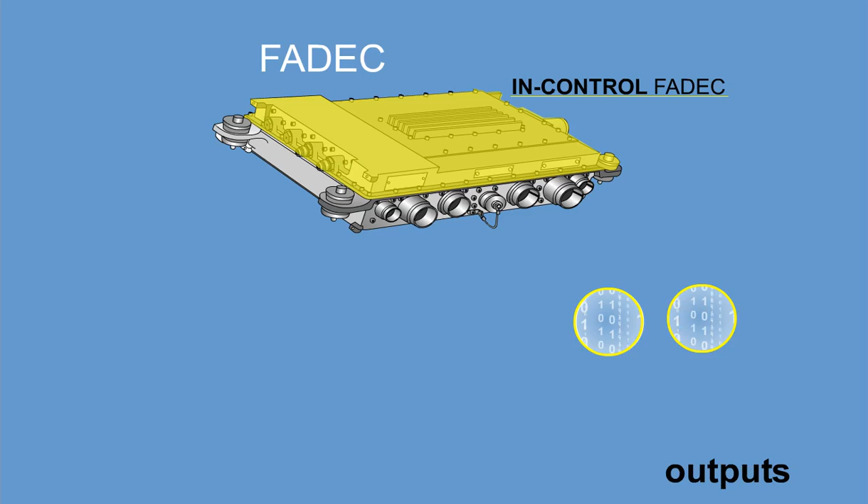Engine fuel system operation begins with information supplied by the FADEC, providing steady state and transient regulation of thrust while protecting engine limits. One FADEC channel operates as the in-control channel, providing electronic control outputs. The other FADEC channel operates as standby, processing all inputs but with electronic control outputs disabled during normal operation. With two capable FADEC channels, in-control software logic causes the channels to alternate control on each successive engine start.

Main FADEC power is supplied by the PMA during engine operation, with a 28-volt DC airframe input for starting and backup.

The in-control FADEC channel and the FMU automatically initiate fuel flow and ignition in response to engine core speed information from the starter. In-control selection is made at 6.7% N2, and the FMU is pressurized to control the metering valve at approximately 6.7% N2.

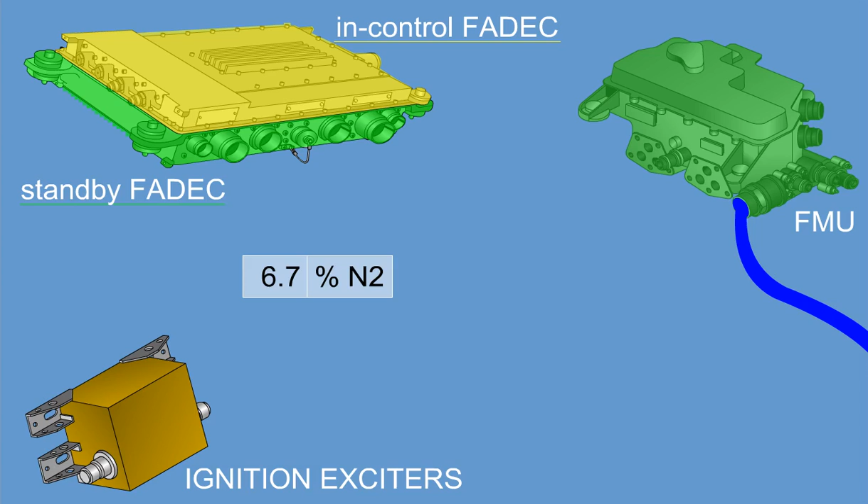For ground starts, ignition is commanded on at approximately 9.5% N2, and fuel is introduced at approximately 20% N2. After light-off occurs, the in-control FADEC channel commands the starter cutout at approximately 50% N2 and controls the FMU fuel metering valve to accelerate the engine to the thrust setting calculated from the FADEC inputs.

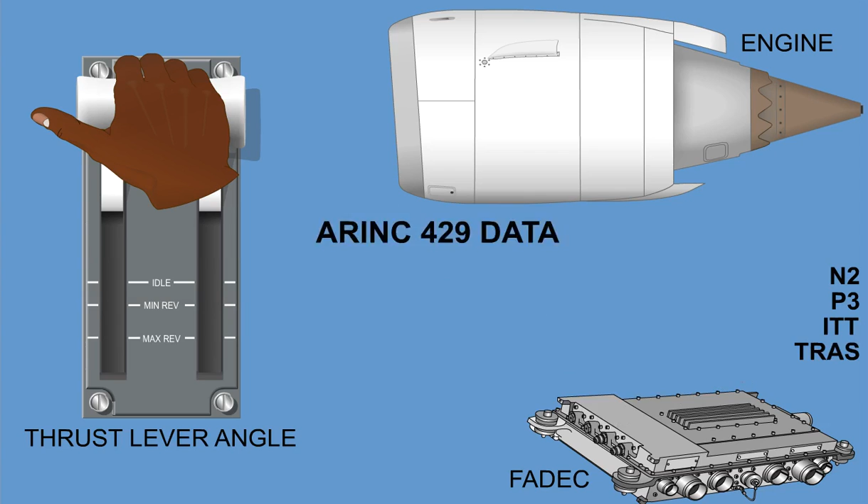Thrust control of the engine is provided by the FADEC, with thrust management based on aircraft and air data inputs. The main thrust setting inputs are the thrust lever angle, TLA, and the air data from the engine and airframe sensors. These inputs are used to calculate appropriate reference N1 for any given throttle position.

During normal engine operation, the FADEC will control to a physical N2 or a P3 reference at idle throttle settings, and to a physical N1 reference at any power above idle up to maximum power.

The FADEC uses the following propulsion system signals to control fuel to the engine: N1 fan rotor speed, provided from the N1 speed sensor that produces a frequency output derived from a 25-tooth wheel on the fan shaft, proportional to fan speed.

N2 core rotor speed, provided by the N2 sensor mounted on the accessory gearbox and from the engine-mounted alternator, PMA.

T12 total ambient temperature, taken from the dual T12 temperature sensor mounted in the engine air intake and from the aircraft total air temperature sensors.

T25 compressor inlet temperature, provided by a sensor mounted in the flow stream in front of the compressor.

T3 compressor discharge temperature, provided by a sensor mounted in the flow stream in the rear of the compressor.

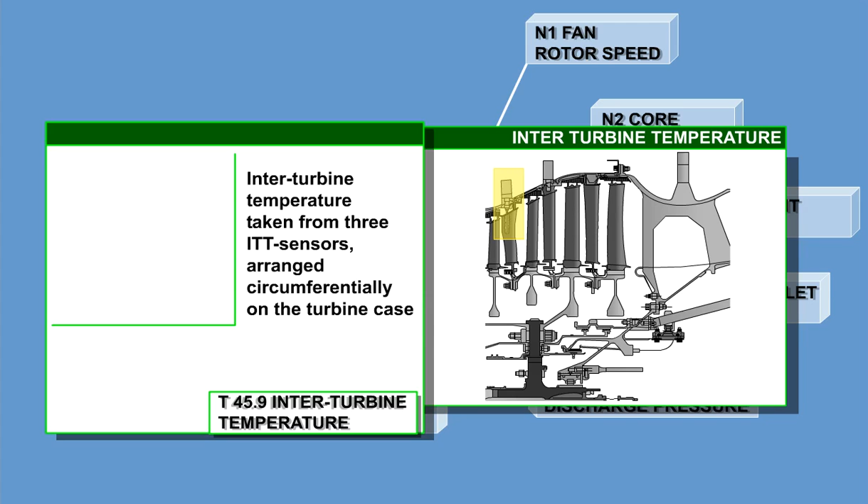T45.9 inter-turbine temperature, taken from 3 electrically identical ITT probe assemblies, each consisting of 3 dual thermocouples, arranged circumferentially on the turbine case.

Position of the fuel metering valve, FMV, inside the FMU, measured by a dual-wound linear variable differential transformer, LVDT.

The variable stator vane actuator position, also measured with a dual-wound LVDT.

The variable bypass valve actuator position, measured with a single-wound LVDT in each actuator.

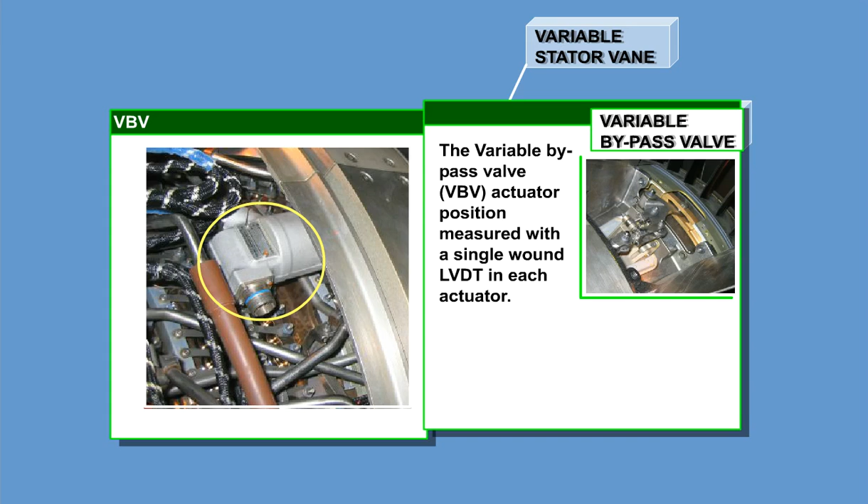The high-pressure turbine clearance control, HPTCC, valve measured by a dual-wound LVDT.

The transient bleed valve actuator position, measured by a dual-wound LVDT.

Thrust reverser position, taken from thrust reverser, TRAS, actuators number 3 and 4, which have an LVDT and a locked switch that are read by the FADEC.

Engine compressor discharge pressure, PS3, taken from the combustor case and sent forward through a pressure line to the FADEC PS3 pressure transducers.

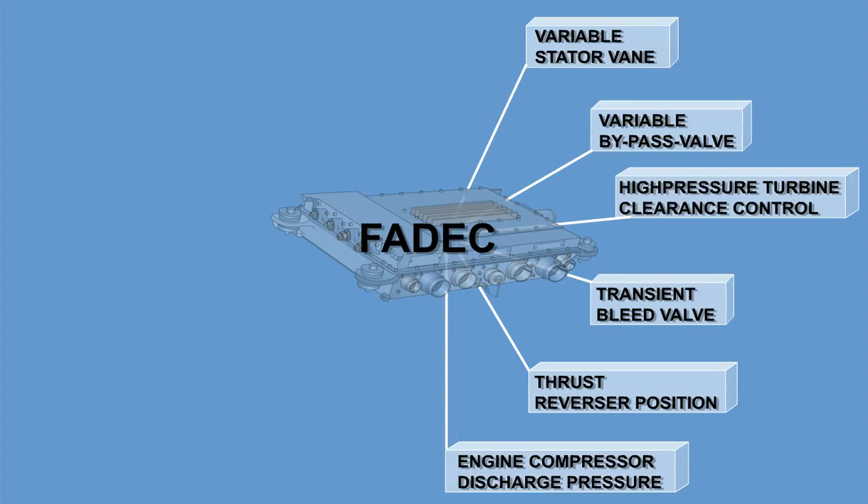Alternator power from the engine-supplied PMA, and engine inlet static pressure, P0, which is taken by a transducer mounted inside the FADEC, and from the aircraft pitot tubes mounted on the forward section of the fuselage.

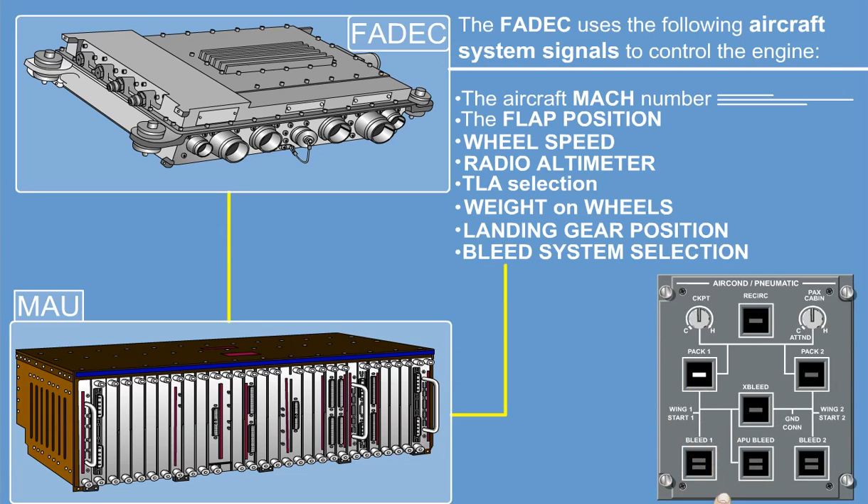The FADEC also uses the following aircraft system signals to control the engine: aircraft Mach number, flap position, wheel speed, radio altimeter, TLA selection, weight on wheels, landing gear position, bleed system selection, and information from the engine identification and configuration plug.

The engine configuration plug, ECP, mounted to the FMU bracket, provides data that is read by the FADEC at the time of power-up on the ground. The ECP provides information on the engine serial number, engine thrust rating, hardware configuration, and N1 modification, N1 trim.

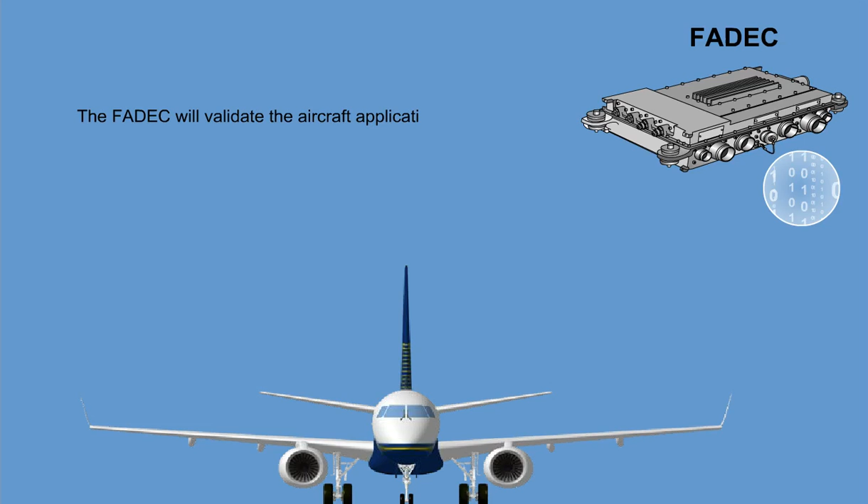The FADEC will validate the engine configuration by comparing the engine configuration from the ECP to the FADEC software. Similarly, the FADEC will validate the aircraft application by comparing the aircraft application from the APPID to the FADEC software. If the FADEC cannot accommodate the aircraft application, it will transmit the appropriate EICAS messages to the cockpit. The aircraft MAU will also compare the engine ratings from both engines as a validity check.